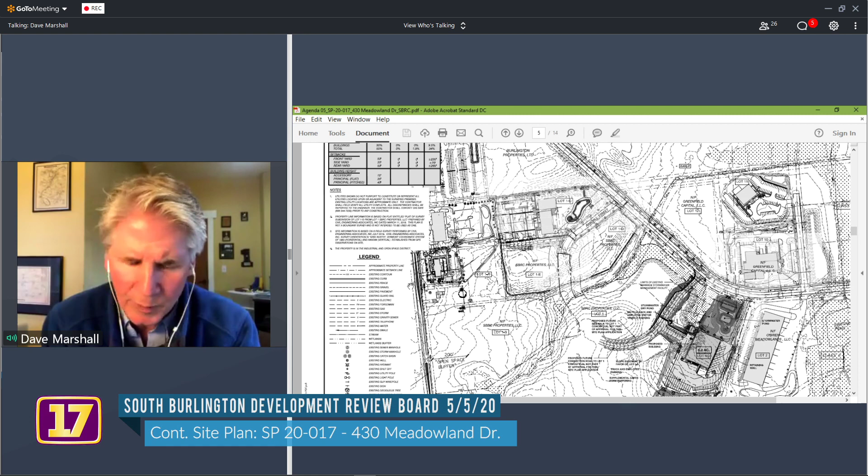And we submitted that for staff review. We do have four comments with regard to the site plan component, and then we also have additional comments concerning the proposed roadway. So to keep things simple, we can start on site and then move out to the roadway. Do you want me to read the comments?

Matt, you may have been muted there.

Okay, why don't we start out with staff comment number one. Staff recommends the board review the revised plans, including the truck turning movement plan, discuss with the applicant the proposed circulation patterns, and determine if they consider these criteria met. So maybe we can look at one of these images of the truck turning movements.

So Marla, there's sheet C2.5, which provides the truck turning overlays on top of the proposed conditions.

Dave, you greatly overestimate my ability to multitask. Dalila runs the presenter and I take the notes. Yes, Dalila, show us the truck turning movements. Oh, that's the one. That's the one I was looking at.

So what has changed since we last saw this? In this particular case, what has changed is that the access coming off of Meadowland Drive, that's the existing roadway in the top right-hand side of this particular drawing, and the curb cut — thank you, Dalila, or was that Marla? There we go. That represents the proposed curb cut. The previous discussions we had were that the state asked us to cross the wetland at the narrowest point.

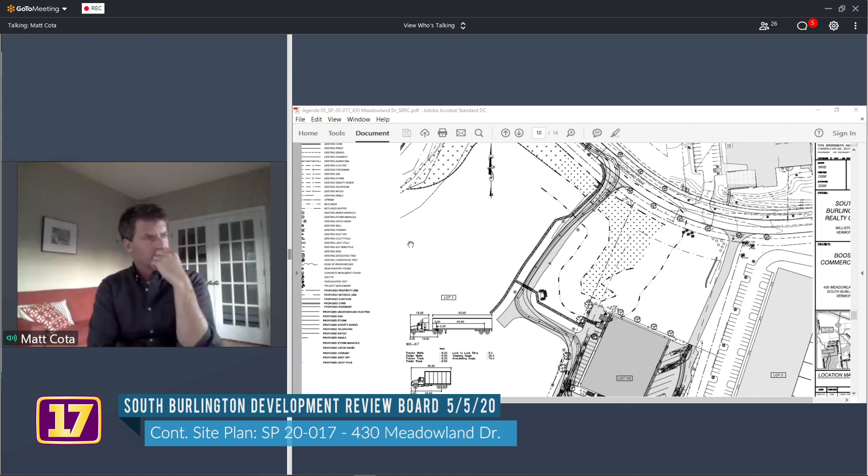Dalila, if you can just move the drawing up a little bit on the screen so everybody can see at least the bottom half of the site. You can see how the truck movements basically come into the site, either back into loading areas or into parking spaces, or continue back out from those particular spots onto the east side or right side of the site, and then continue on out into Meadowland Drive.

The truck movements aren't shown on that last new section of roadway, but ultimately being straight, it comes out. There will be a discussion regarding the radii used at the intersection with Meadowland Drive, as you go off this particular sheet for those who can see the plan.

Going back to the stormwater stuff, but skipping ahead to staff comment number 3, which talks about truck movement should only be to the left and recommends the board require the applicant to minimize turn radius on both sides to no more than 20 feet maximum, as indicated in figure 15.1D for streets. Can you identify, Dalila, maybe with a pointer, where we're talking about truck movements being only to the left?

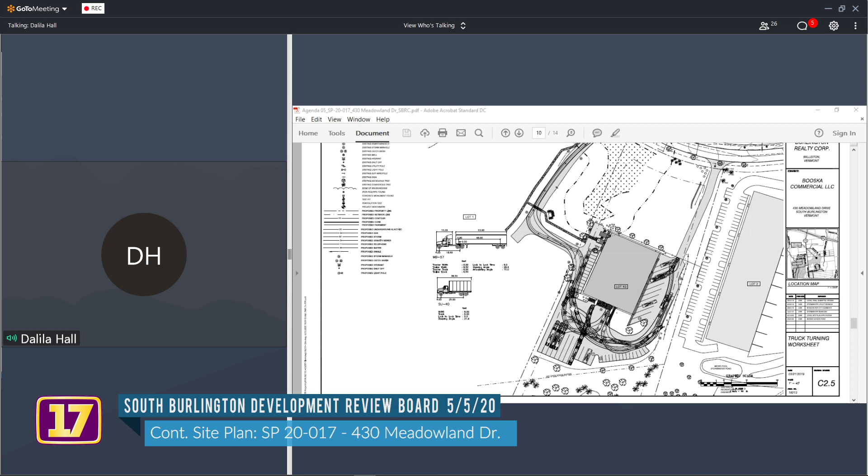There you go. All attendees can draw, so if you want to grab it, Marla. Sure. So if the circulation is sort of this direction, and Meadowland Drive is a dead end, trucks only leave this way.

We have no problem accepting condition number 3 as a condition of approval. So what it does is narrow up the throat of that proposed curb cut out of Meadowland Drive, and the radii becomes shorter. In this case, Marla's point is well taken that 99.9% of the truck movement will be to the left. There may be some client in the future on the right-hand side of this driveway, but most will be going to the left.

So we have no issue with tightening up that driveway to facilitate left turn only. Number 4, as long as we're still talking about the driveway, staff recommends the board require the applicant to place stop signs on both sides of the driveway and extend the painted stop bar across the entire width. David, does the applicant have an issue with this? That's acceptable as a condition of approval. Okay, that's good to hear.

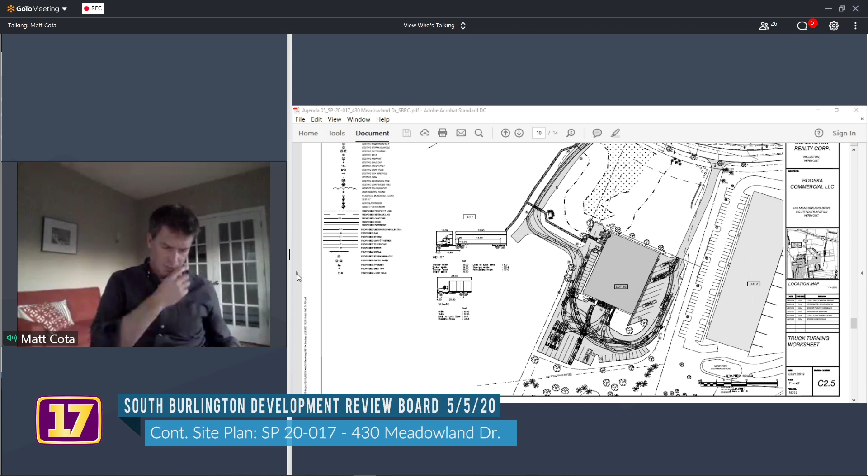Let's go back to stormwater. I'll just go over them briefly for those that don't have the documents in front of them or that are listening. The stormwater section has reviewed Booska Commercial at 430 Meadowland Drive, and the plan prepared by civil engineering offered the following 4 comments. First, that the proposed project is located in the Potash Brook watershed.

Second, that 12-inch type 2 stone should only be shown around the risers on the inlet side of each gravel wetland cell. Providing this around the outlet risers of the cells potentially allows for short circuiting through the system.

Item number 3, sheet C30C should be updated to include a silt fence and demarcation fencing to protect the wetland bounded by the stormwater features and access driveway. And number 4, the DRB should include a condition requiring the applicant to regularly maintain all stormwater treatment and conveyance infrastructure.

Staff recommends that we include these comments from the city stormwater section as conditions of approval. Is the applicant find that acceptable? That is acceptable. Okay, good. Is there anything else that Dave, Tim, or David would like to add before I ask the board if they have any other comments?

No? Anyone on the DRB have comments about the circulation or the left turn or anything else before we go on to item 6, which is related to this?

Okay, so while we've got you all here, we already opened it, SP 20-016, 362 Meadowland Drive, and we'll talk more in depth about the roadway, public and private. But first, the comment from staff: at the previous hearing, the board briefly discussed with the applicant the potential for a condition to prohibit additional curb cuts off Meadowland Drive accessing Lot 1. Staff recommends the board conclude this discussion.

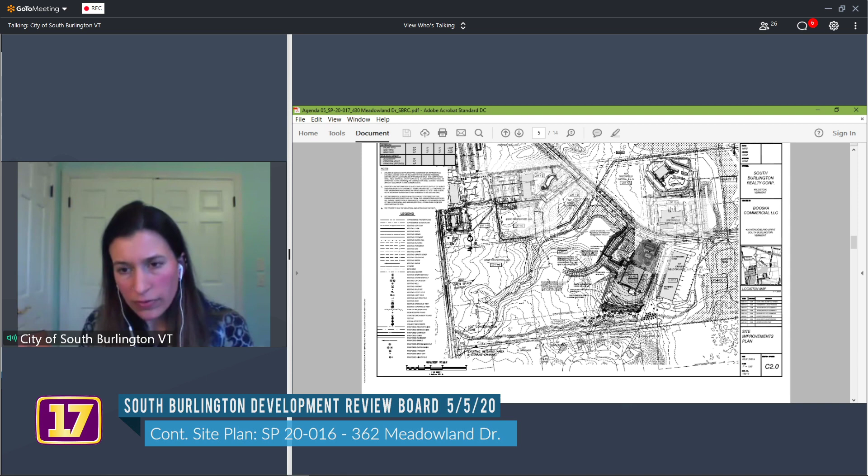Obviously, the wetlands program has said this is the only place you're going to be allowed to put in a curb cut. I just want to make sure the board didn't have any further questions for the applicant before making their determination on whether there should be a condition prohibiting additional curb cuts off of Meadowland Drive.

So Marla, if I understand how this works, if there's a condition that says no more curb cuts on Meadowland Drive, the only access to Lot 1 is through that new road, which may be public or may be private, depending on what happens.

Dalila, can you pan so you can see both Randall Street and the new one? Same sheet, just pan over a little bit. Even more. There you go. So, that is it. Go ahead, Marla.

Dave, do you know off the top of your head how far those two are apart? I'm going to say that's probably 600 feet. Okay, yeah, good. Probably closer to 800 feet.

So anyways, cutting to the chase here, the applicant is willing to accept a condition of approval that there would be no more curb cuts servicing Lot 1 other than what is shown on this plan. So we all see the writing on the wall with regard to both the city's desires as well as the state's desires with regard to this area of Meadowland Business Park.

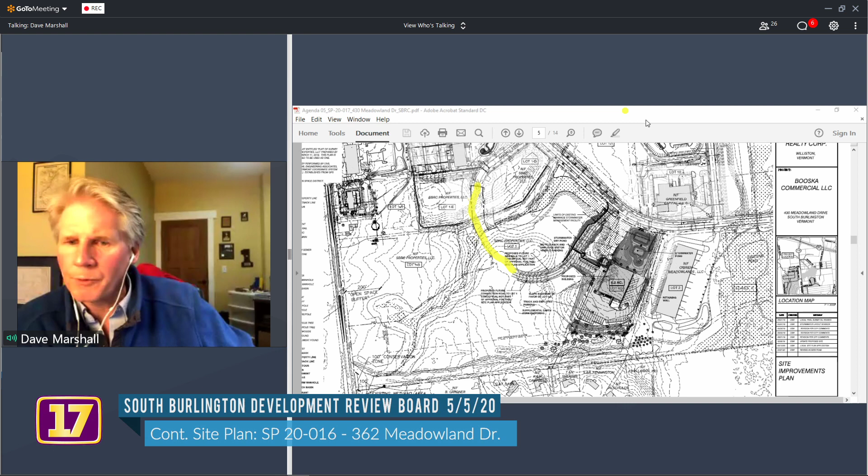Thank you, David. Anyone on the board, do you have any issues with limiting the curb cuts to this property? No, I don't, Matt. Mark here. Okay, thank you, Mark. No issue. It's John, I'm fine. This is Dawn. Thanks, Don. Okay, I think we're good there.

Moving on to item 2, the same comments from the stormwater section chief apply to this application. And I would assume, Dave, that you're fine with those comments as conditions of approval in this application. That is correct. This is acceptable as a condition of approval.

Okay, thank you. Moving on to page 3 of SP 20-016, item number 3. This is private versus public, which is pretty much the rest of this question, and how we're going to get to a decision on this new road and whether it's a private road or a public road or a private road to become a public road.

If I can paraphrase what is two healthy pages of questions, so I understand it, please Marla or Dave correct me where I'm wrong: if we are to say that this is a private road now, but could be made public should Lot 1 be developed, it's got to be engineered to the standards of a public road. That's correct. So is it right now to the standards of a public road? Or does something have to change in order to meet those standards?

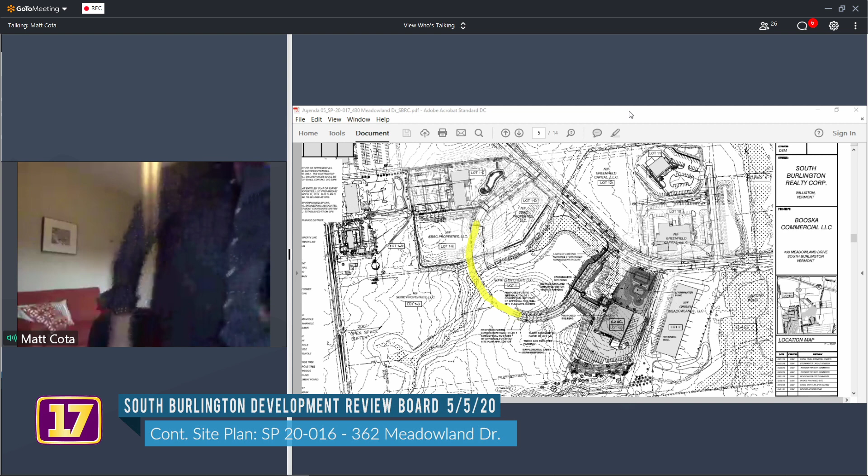Okay, so I think we have an agreement on what we want to happen. We just have a discrepancy on what the actual width is, whether we're measuring pavement or not. I'm not sure how to sort through that right now.

I'm not a street engineer, I have nothing to do with paving. This is John—I don't think it really matters. I think the point is we're accepting 26 feet of asphalt. We did before, and we would be doing so again. Matt, I agree with John. Thank you, John. Thank you, Mark. This is Jim, I do too. And Brian, I concur. Thank you, Brian. I'm good with that. Thank you, Dawn.

Okay. So what else do we have to summarize, Marla? Go ahead, Marla. The board is going to say it needs to be built to public roadway standards—it needs to be built to the cross section that is provided in the plan set, but it will be private.

Are we putting a specific thing or just until such time as the director of public works makes the recommendation? Well, we could either say that, or we could be specific and say until the road is connected to Randall Street, or lot 1 is developed and that road becomes a shared road.

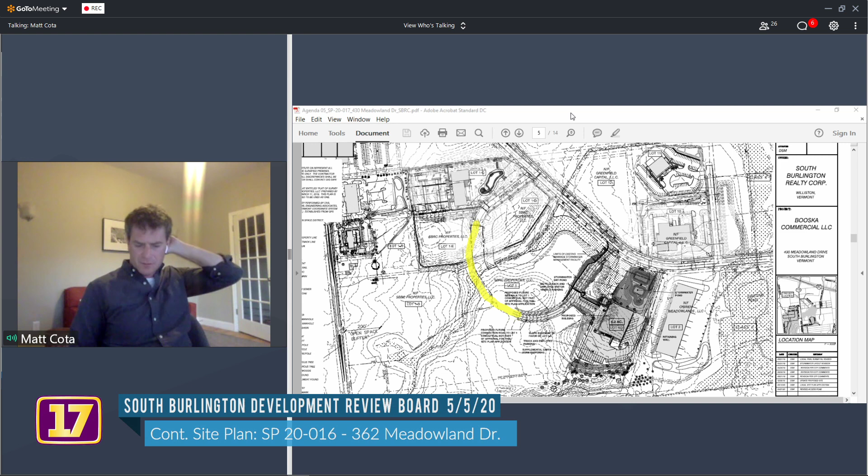Right, okay, I think we've got it then. Anything else, Marla? Nope, thank you. Okay, are there any other questions from the board or any other comments from the applicant before I turn it over to public comment for either application, either site plan application, SP 20-017 or SP 20-016?

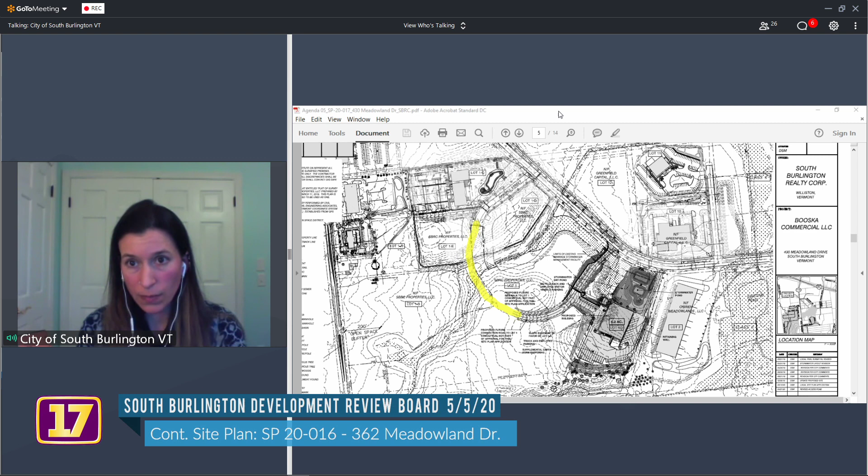So Matt, I need to be a little technical here, unless you want to lead it. Because of the meeting login snafu and the board's expressed desire to be as transparent as possible, I would recommend the board keep this item open to the next meeting. In consideration for the applicant, though, I would proceed with preparing a draft decision. And if there's no additional public comment at the next meeting, the board can go ahead and issue that decision, as though it wouldn't change the schedule unless there is additional public comment received between now and May 19th.

Right, and this is consistent with what we've done earlier, I think it was the second or third time we did the GoToMeeting app. And I will admit, this may be disappointing to the applicant, who wished that we could close tonight and not continue.

This is expressly for the purpose of allowing those that were not able to log in tonight, or had a technical challenge, an extra week or two to submit a comment. A draft decision will be done, and we'll continue it. The next meeting will be purely for the purposes of closing it, unless we hear comments or other information that allows us not to.

But that's how it is in this new world we're living in. So what is the date of the next meeting, Marla? May 19th.

I would move that we continue site plan application SP 20-017 and continued site plan application SP 20-016 both to May 19th. Do I have a second?

I'll second, this is Dawn. Seconded by Dawn, and we'll call the roll so this is clear.

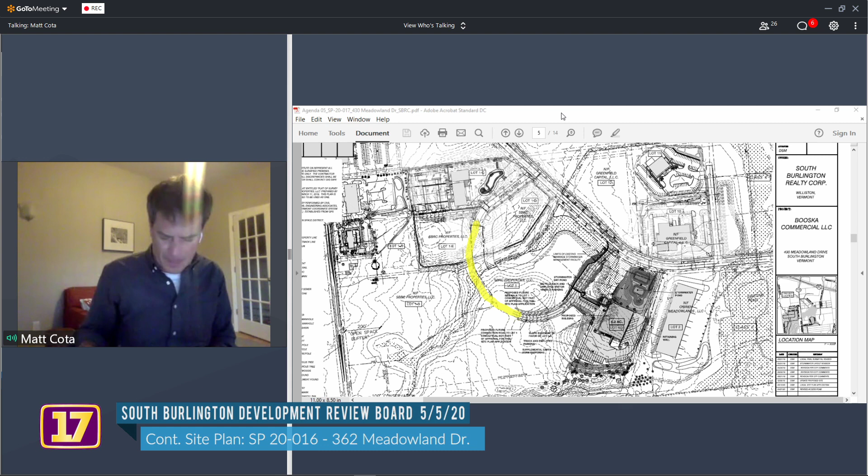This is miscellaneous application MS 20-01 of Burlington International Airport to establish an overall landscaping plan for an approved airport complex at 1200 Airport Drive. Who is here for the applicant?

Larry Lackey, Director of Engineering and Environmental Compliance. Carolyn Orban, Wagner Hodgson Landscape Architecture. Keith Wagner, Wagner Hodgson Landscape Architecture.

Anyone else out there? This is Dawn. Before we have the applicant present, I have a question for probably Marla. Okay, sure, I just have one quick thing to say first.

Keith, I think we're getting some feedback from you, so if you could be proactive about muting when you're not actively talking, that'd be really helpful. Thank you, sorry. That's good advice for everyone, including me.

Okay, Dawn, with your question, go ahead. In the past several months we've had a number of applications related to the airport, and I admit I don't know a lot about the organizational or ownership structure, but it seems like we've had a lot of different applications. Could you explain, are these unified under some previous master plan? Is there a way to tie these together, and why are there all these different applications? I understand the hotel is probably owned by someone else, but...

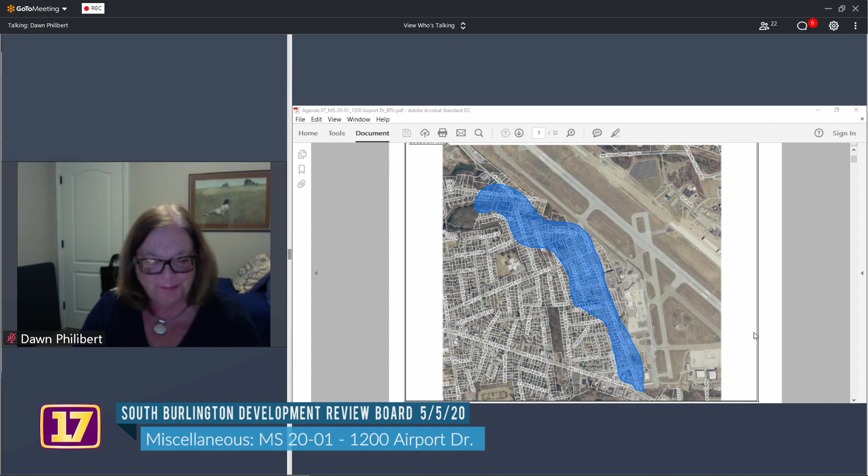Larry knows this better than I do, but there are much grander plans than what we're seeing here in the master plan for the airport, and it's simply too complex to step into in one meeting like this. But it might be worthwhile, even though it's probably better for planning commission, it might be worthwhile at some point for the airport to sit down with planning commission or DRB to walk through what's coming over the next 10 to 15 years. There's a lot there. I've been to meetings on it, and this is just one step.

Okay, so thanks, John, we'll see a lot more. From the airport's perspective, every 5 or 10 years we go through a new master plan process where we're required to by the FAA. We're currently in that process, and we're going through multiple public meetings, which we've had, which Paul Conner typically from the Planning and Zoning Department takes part in.

But we would gladly come in and talk about where we're at from the old master plan and what we're looking forward to for the next 10 or so years in the new master plan. There's been multiple public meetings, and there's going to be still multiple more on our overall master plan. And we did tie this landscaping master plan into our overall FAA master plan to pull them together.

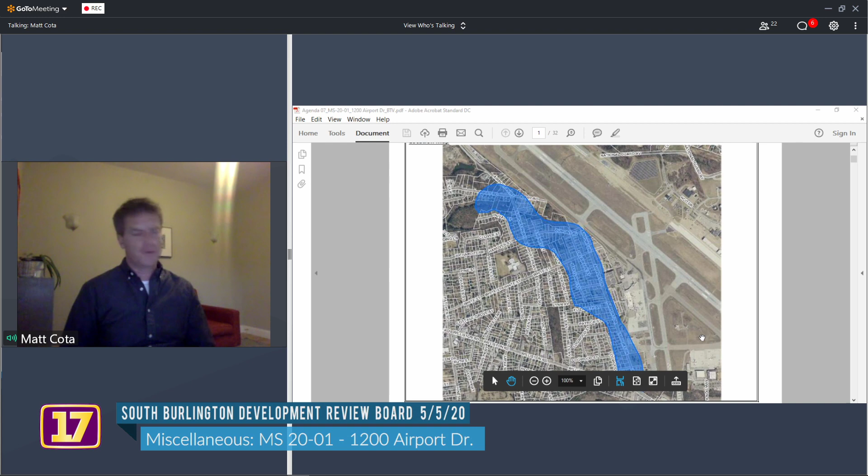Okay, so Larry or anyone on your team, maybe we best proceed with this. If you just give us a brief summary overview, and then we'll go through some of the staff comments more in depth. But if you could do a 30,000 foot overview, no pun intended, of what you're trying to do here. All right, well, I'll do a little introduction, and then I'll turn it over to Carolyn, who's done most of the work with Keith.

Basically, we come before you for multiple applications, as we just spoke about. Landscaping is a challenge due to safety issues with respect to the airport, both from trees at the end of a runway or attracting wildlife within the airfield fencing.

So we have to be very careful, and we have requirements we have to live by, including full-time USDA coverage for wildlife. When we came before you for our maintenance garage addition, which we have not moved forward with because we're looking at a bigger project down the road, we were asked or provided a condition that required us to submit a master plan for landscaping. Just that the condition was to submit it.

Please understand that the plan that we've developed, we worked with your staff, and it is a concept. It's a live document, and will be continually changing as time goes on, as the city progresses and the airport does. But this is our starting point. And with that said, I'll turn it over to Carolyn and Keith to do a 30,000 foot overview.

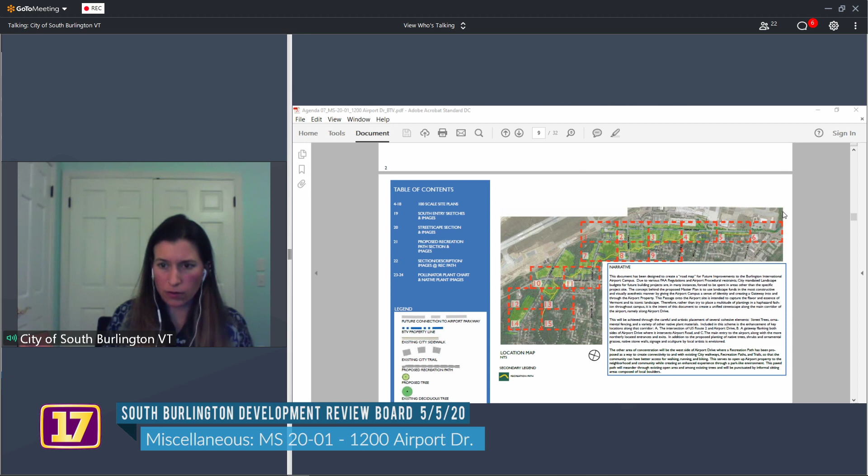You can draw on it if you go to the top and click drawing tools, if you need to point to something. I'm going to have a hard time with this because I can barely see it, the green is so small, but basically this is it. We did have, from the entrance over to White Street, it goes kind of like that. Did my line draw? Let's try that again. Doesn't seem to be working. There you go. Oops, that wasn't very good.

Sorry, but what I'd like to say is that we planned all the paths so that they would be on the west side of that line. So to cut to the chase, Carolyn, the answer to the staff question is we're not creating plantings that might be disturbed should that alignment of the road happen. Well, that's to the best of our knowledge, unless that alignment itself is conceptual. But to the best of our ability, yes, we have kept the planting we want out of the way.

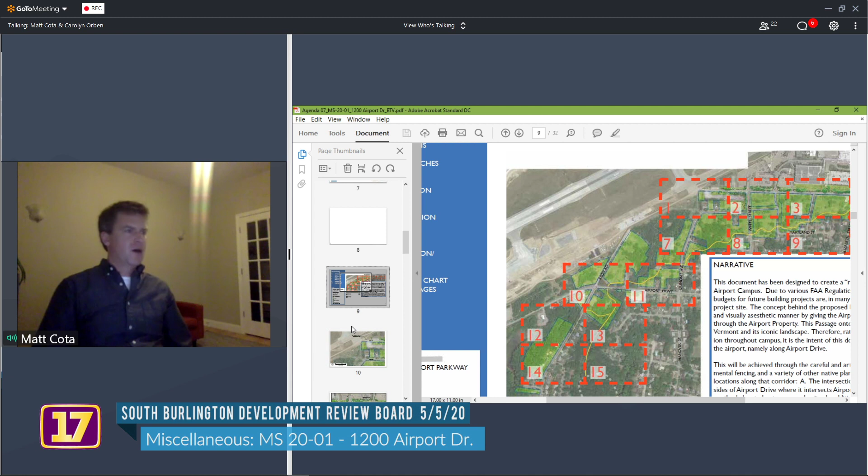Number two: the applicant is proposing a recreation path along the west side of the airport-owned land. Staff recommends the board ask the applicant to describe the proposed recreation path features. This will go on the west side over here. If you want to go to page 21, Dalila... keep going... the second one down... 27 here, there we go.

So we're envisioning a paved path, bituminous concrete, with boulders interspersed along it, and it would meander through the existing trees on site, and look similar to these sketches and these images.

Nice. Any questions from the board regarding the recreation path? Is this bikes or just walking? Both. Yeah, both.

I like it. I like the shade trees, if that's what we're gonna have. You know, this is just a conceptual drawing, but...

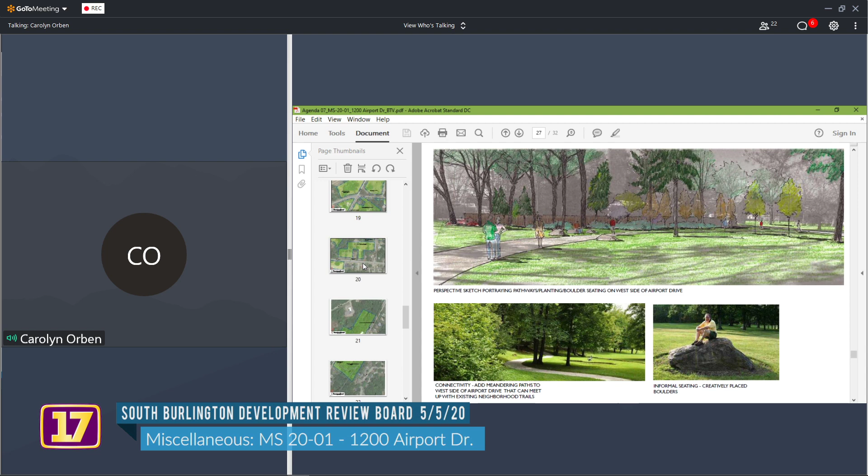Carolyn, does it loop around, or does it empty out? How does it connect into the roadway? Is it a circle? It's quite lengthy, you have to look through all the pages. It goes all the way through the site. If you go to the page we were on when I was drawing that line, you can follow the path. It weaves all the way from Airport Drive, at the corner of Airport Drive and Airport Road, all the way north. It's a yellow line. Yeah, and you can see where it connects down at city property. And then does it terminate at number 15, with the circle there? Yes.

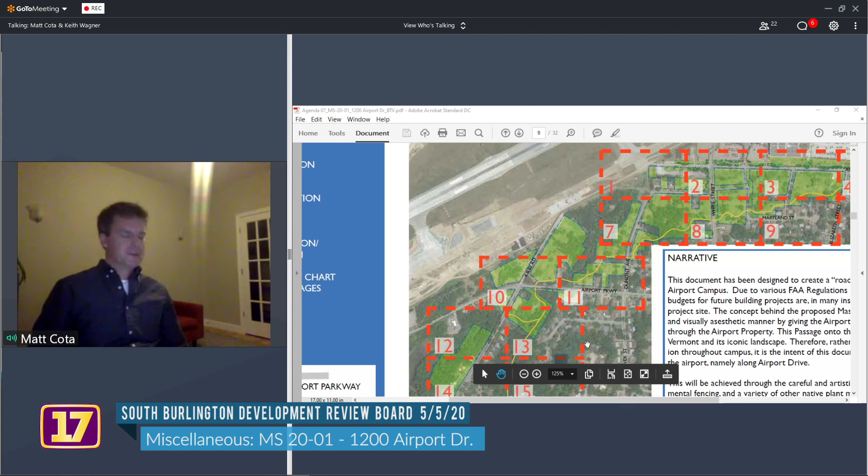Okay, if there's nothing else on the rec path, the staff and applicant may discuss whether—this is item number 3—it made sense to include a sidewalk on the west side of Airport Drive. The ultimate conclusion was that existing sidewalks provided adequate access to buildings, and an off-road recreation path better addressed the recommendations of the Chamberlain neighborhood study. Staff recommends the board review the existing sidewalks to determine whether they agree with that conclusion.

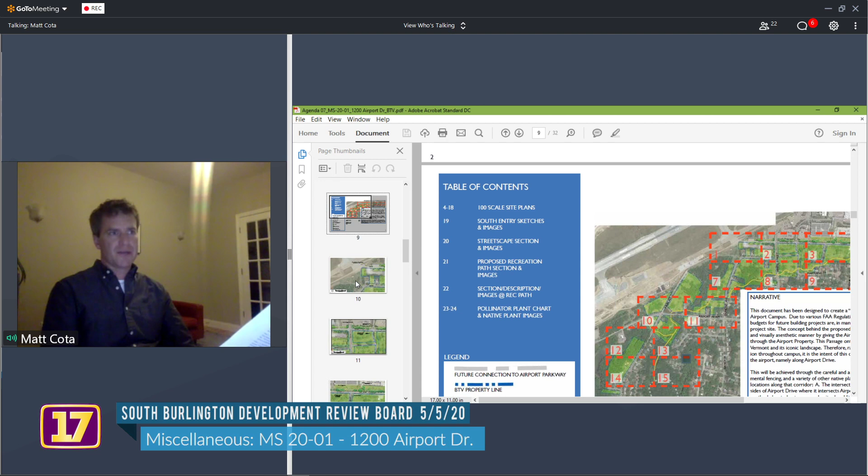I haven't been out there recently to check out the sidewalks, but if anyone else has—I certainly would concur that a recreation path is desirable per the Chamberlain neighborhood study. So, but Elissa or Jim or Brian, any other thoughts about that?

Hey Dalila, could you go a little bit farther, a couple more sheets? So you can see here, perfect, that there's only a sidewalk on the east side of Airport Drive, there's no sidewalk on the west side. This is where staff met with Wagner Hodgson, and we talked about it a lot, and concluded there was no destination on the west side, so it didn't make sense to add a sidewalk there. So the sidewalk you're seeing on this sheet is existing.

Dalila, can you go up one sheet, just one more? So now we're on page right, connecting to page left of the previous page. There's still no sidewalk on the other side, but there's also still no destination. One more sheet up. And then there's the crosswalk right under the word 'continuation of.'

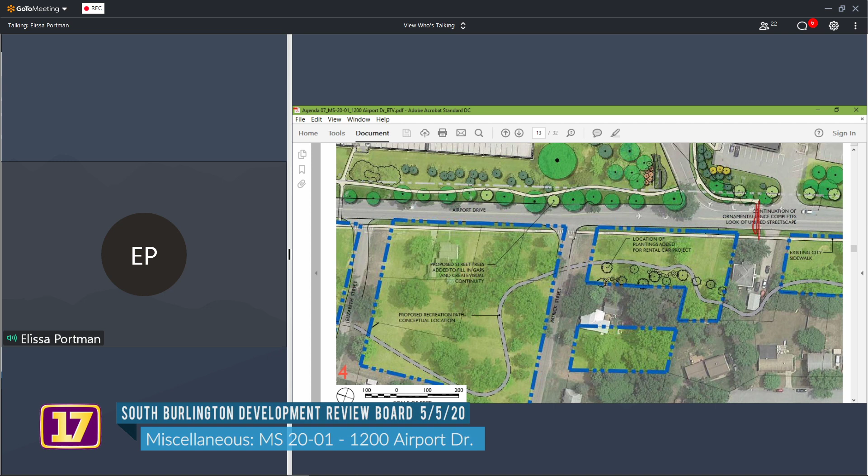Okay, item number 4, review the plans on a sheet-by-sheet basis. Sheet 1: the city has identified the bend in Dumont Avenue as a potential location for a stormwater BMP associated with the Centennial Brook Flow Restoration Plan. The city works with landowners to establish agreements allowing the BMP to be located on the property. The city would be responsible for construction and maintenance of the BMP, but would not install any landscaping beyond the minimum necessary for BMP success. Staff recommends the board ask the airport to include in their plan a general concept of landscaping they may wish to include around the BMP, and support the board's inclusion of this landscaping in the overall landscaping plan.

So this doesn't exist yet, correct, Marla? This is a potential stormwater mitigation measure at a couple spots on Dumont Avenue.

Right, so just going through on a sheet-by-sheet basis, I guess we could pull up the other plan, or just draw on this one since it's not that complicated. If you wanted to just leave it up, I think it's fine. Yeah, just leave it up and draw on it. You can.

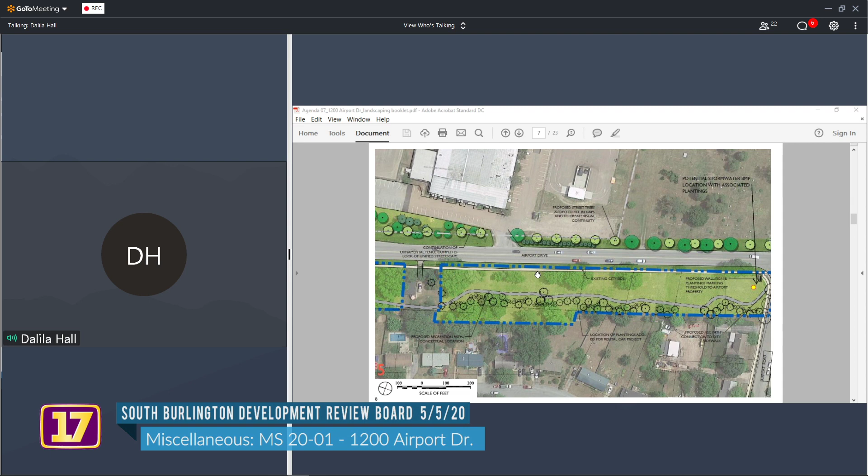You got it, just flip back to the PDF, should be fine. Sorry, it's giving me issues. There we go. That better? I think it's sheet 4. Yep, you just passed it. One too many, I guess it was 3. Is that the sheet? No, 4, sorry. So if you go to sheet 3, please. PDF page 3. There we go.

So this is where the little yellow dot is what we just waited for. I'm really sorry, I should have just gone to the little yellow dot. This is where the city has identified a potential location for a flow restoration plan stormwater practice. The city would be installing this practice with agreement with the landowner, being the airport. There's an opportunity here for the airport to beautify this feature. Not sure this one makes a lot of sense, but there's another one farther down. I don't know if Carolyn, you guys have given any thought on your interest in beautifying this one, and then we can talk about the other one when we get to it.

All I was going to say is that we're happy to include a concept for additional plantings on both of those BMPs, and we've noted it on the updated plans.

Larry, did you want to say anything about it? Right now we believe they're going to be underground chambers, so it's not going to look much different when they're finished, just the grass lawn, but we don't know that yet until we work it out with the city.

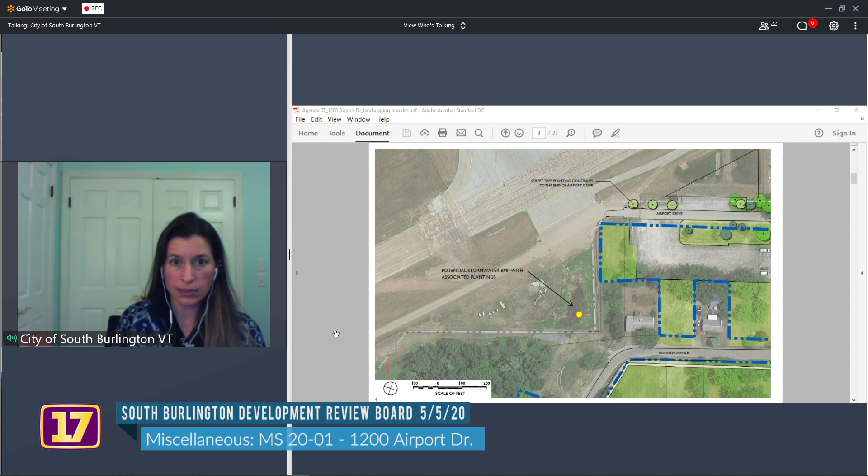Marla, does the city come to you for permits for those? I'm sorry? Does the city come to you for approval of those BMPs? It depends on the type. If it requires movement of more than 20 cubic yards, either net gain or net loss, they'll get a DRB permit, but if it's less than that, they will not.

Right, okay, well these are rather small ones, and again I think they're going to be looking towards underground chambers. So it sounds like this one's not a good candidate, which is fine. We can just move on.

Okay, just going in order, item number C, sheet 5, similar to sheet 1, city has identified the northwest corner of Airport Drive and Airport Road as a location for a stormwater BMP in support of the Potash Brook Flow Restoration Plan. Staff recommends the board allow landscaping around the BMP as credit towards the minimum required landscaping budget and overall landscaping plan. So let's look, is this a different location you're going to show us, Dalila and Marla?

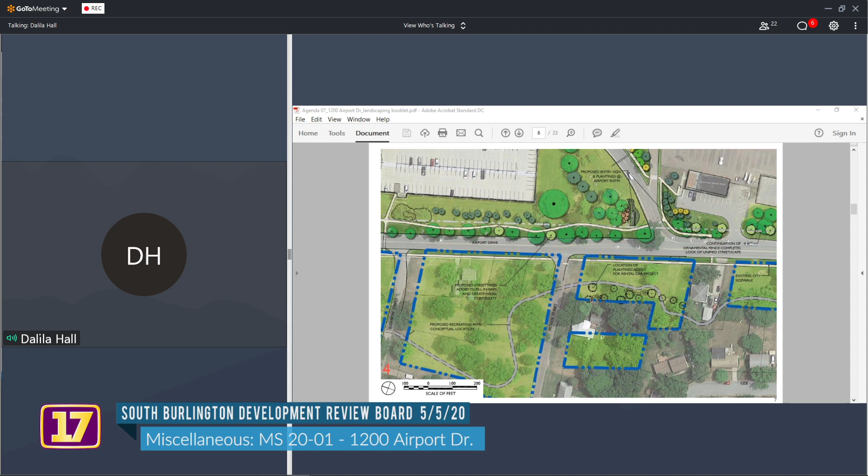Is it sheet 5, PDF page sheet 5, or this page marked 5? The page with the 5 in the corner. Yeah, that one. Okay.

So again, the yellow dot, this one is obviously more on the rec path. Yeah. You could see why you'd want something there. I'm not sure why. We also have a gateway component in that area, so it might all tie together. Yeah, that would make sense, Carolyn. Okay, well, I think that's important to tie it all together.

Item number D, sheet 7 and 9. Do you want to go back? I think we skipped B. Oh, item B, sheets 2, 4, and 6. Yeah, sorry about that. I was just getting the B piece.

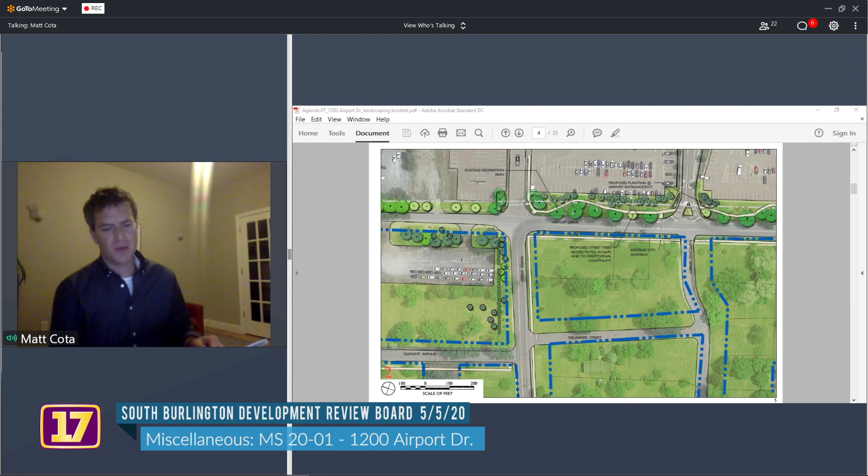These sheets generally show infill landscaping, the recreation path, and some features around the entrances to the airport driveway. Staff recommends the board review the type of entrance features proposed and make a determination on what elements they would allow as credit towards the required landscaping budgets. So maybe we want to pull up sheet or page 19, which shows those features.

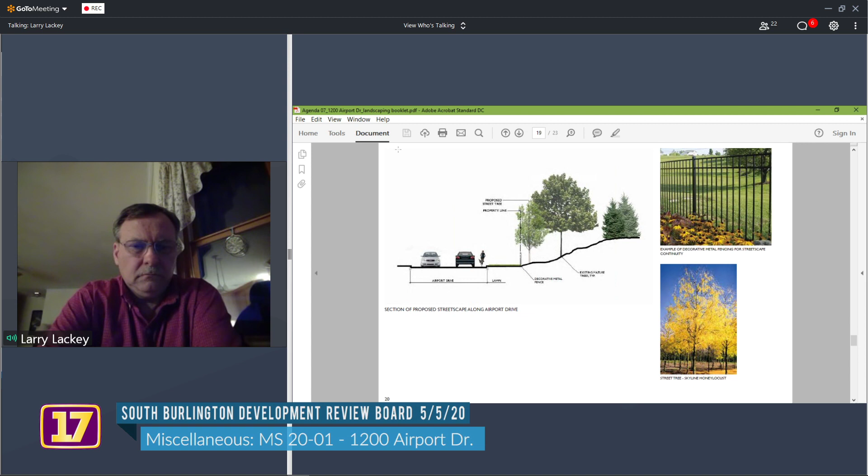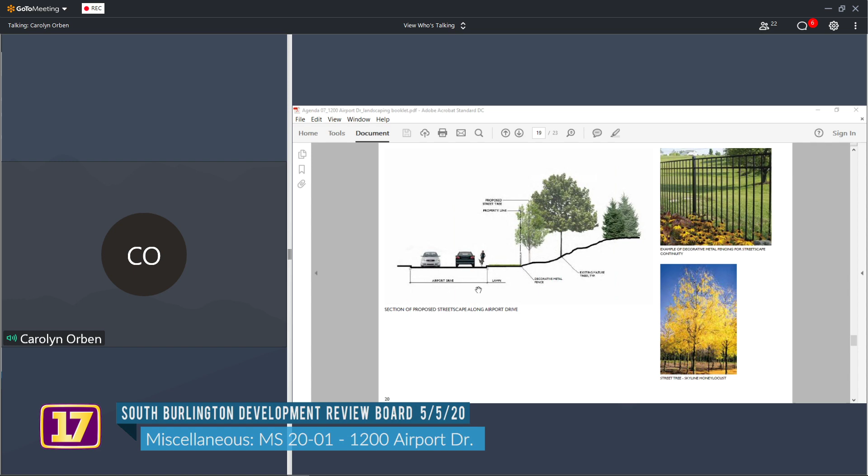Keith, did you want to add anything to that? Yeah, this is Keith Wagner. This was an important intersection for the identity of the campus, with traffic coming east-west on Williston Road, and what's the other road coming right at it? Kennedy Drive. So we thought it'd be interesting to pull the identity of the airport down to this intersection, using similar materials we're using in other locations, just creating a welcoming point where people know they're now arriving at the airport, sort of main intersection, if you will.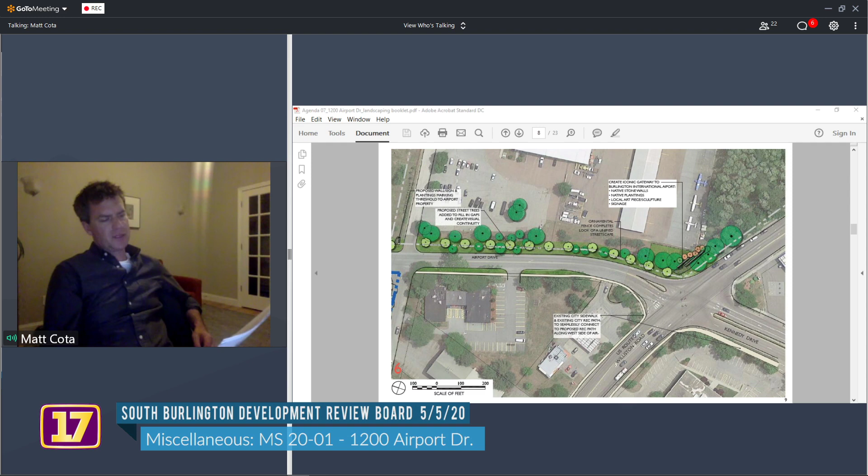Okay, if there's nothing else, item number D, sheet 7 and 9. These sheets show the proposed recreation path. There are no crosswalks at the proposed roadway crossings. Staff recommends the board ask the applicant to include information on the concept of how roadway crossings will be achieved on local residential streets in this overall landscaping plan package.

One thing I wanted to say is the crosswalks themselves would be maintained by the city. I think that's somewhere else in the staff comments, but it didn't make it into this paragraph. So the crosswalks, once installed, if on public streets, we would be maintaining them, which is fine. Do the plans show that? Yes, they do, right there. Yeah, there's one. Is there more than one?

So we don't have the crosswalks identified at this stage, but we're anticipating painted lines, and that could be part of the budget if you think that's appropriate.

This is Keith. I also think this master plan is a concept, and where we've drawn this rec path, it may move. It's important that the airport and ourselves and the city work together to fine tune where these are crossing and how that's going to be done. I think what we're asking is, do you agree with this concept? Moving forward, as it crosses the road or city property, there's got to be some coordination. To date it's been a really nice dialogue back and forth about our concepts and Marla's and Delilah's concerns. So more of that is going to happen, probably with the street department, on exact locations.

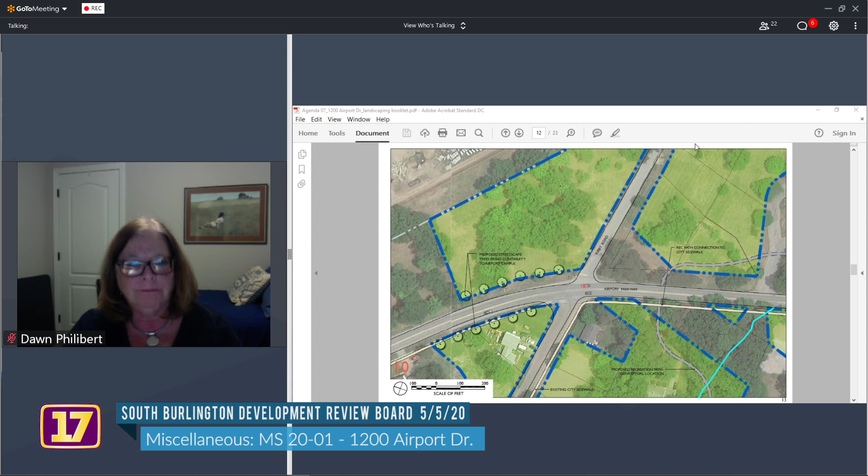I don't know about under, but maybe over. Well, listen, folks, I don't think anybody but me has brought this up from the applicant standpoint. So maybe we should just let them propose something if they want to do it. That's good, good conversation though.

I have a scenario to run by. This is Larry again. So why couldn't it be, and I'd only be thinking of this in simple terms - say we had an area and the budget, we wanted 4 trees, but the budget would only allow for 3. But as long as it was left aesthetically pleasing, presentable and nice, that 4th tree gets planted under the next project. Why wouldn't it be as easy as that? Or say something gets left out and then gets put in the next project in the step of projects.

Larry, I don't have a problem with that as long as there is a next project in the pipeline. And I know what my friend John is saying about things that are going to be in the pipeline, but it would seem to have to be a nexus of where this is going to go, not just the player to be named later, but an actual location based on plans that are in the works.

This is Marla. I think I'm hearing 2 questions. One is, if the budget is $30,000 and in order to complete a segment it's going to cost $40,000, can that extra $10,000 be banked? The other question is, if it can't be banked, does 25% of that section just kind of hang out there until the next project happens, and then that section only gets 75% built? So would the board be okay with allowing them to build the extra and bank it, or alternatively, would the board be okay with them only building 75% of that segment? Is that not kind of the two questions?

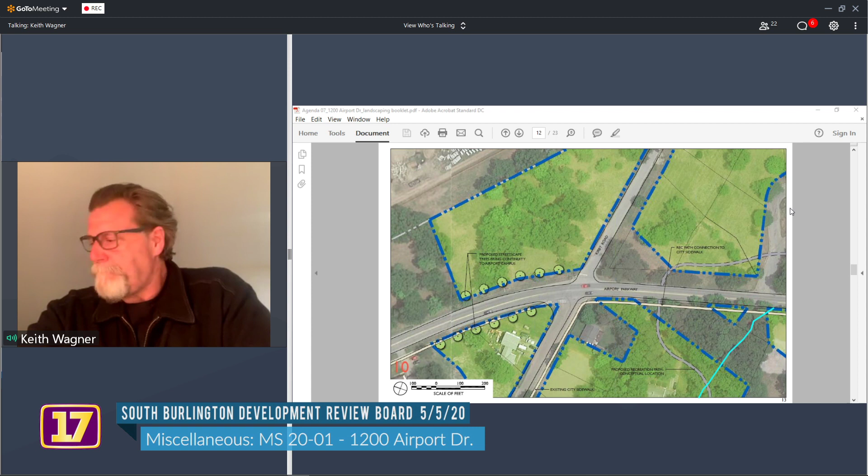Exactly. Okay, so I think we're coming to some sort of consensus here. Where do we move off before we get on that? So can you just summarize the consensus?

In my mind, the consensus is in areas, in projects in which, as we've seen in the past, I can't name them offhand, but where it's difficult to meet the landscaping budget, that wherever they fall short, that money can then be used for, or where they've banked. So for instance, if they go over the landscaping budget for one specific project because they have to, or they want to, or for whatever reason, in other projects that fall short of the landscaping requirement, that excess landscaping that went into the entrance can then be used to backfill any percentage or dollar amount that they could not meet. That doesn't eliminate them from us requiring landscaping for projects just because they've spent a gajillion dollars on the sign out front on Williston Road. But what it does is it allows them, where they can't meet that standard, to backfill that requirement.

Did I explain that right? Well, the purpose of the landscaping plan in general is to give them a pre-approved place to put landscaping that's not on a particular site.

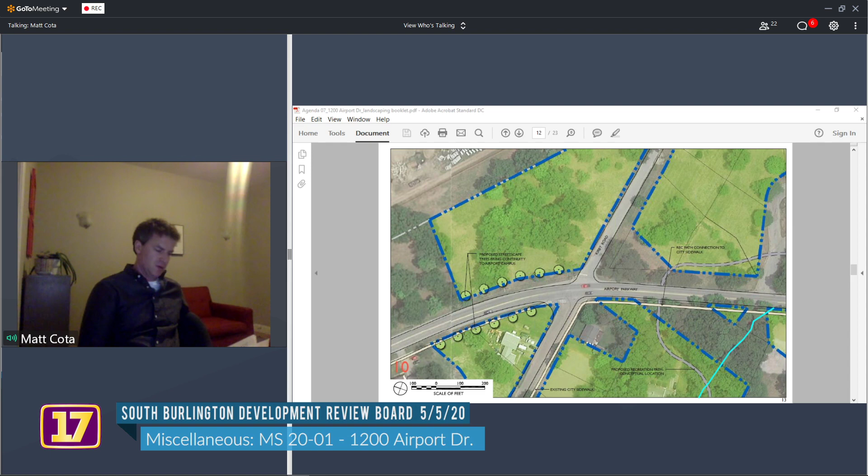Okay, so where we're at now is E. Sheets 10 and 11. These sheets show 3 or 4 locations where the proposed recreation path crosses city land, including the recently discontinued Picard Circle, which now contains subsurface stormwater infiltration chambers.

Staff recommends the board discuss with the applicant who they intend to be responsible for construction of segments on city land. Once constructed, staff considers that since these crossings are relatively short, the applicant should be responsible for maintenance of these sections of the recreation path and recommends the board include such condition in their approval. The city would be responsible for maintenance of the street crossings.

Larry, Carolyn, what's your response to that? Larry, do you want to respond to that? Yeah, I guess if it's on city property, and it's a city path, like snow removal and all that type of stuff, wouldn't they be responsible for keeping it clear for the public?

So this path is proposed to be on airport land. Are you proposing to deed it to the city, the portions on airport land? No, I'm asking about where the path crosses city property. Right, there's a couple places where it crosses just a tiny bit of city property, going from a big stretch of airport to a short stretch of city and back to airport. So if the airport is maintaining and plowing a big stretch and there's a 30 to 50-foot gap, our thought was it made sense for the airport to just continue that piece since it's short. That's fine, yes.

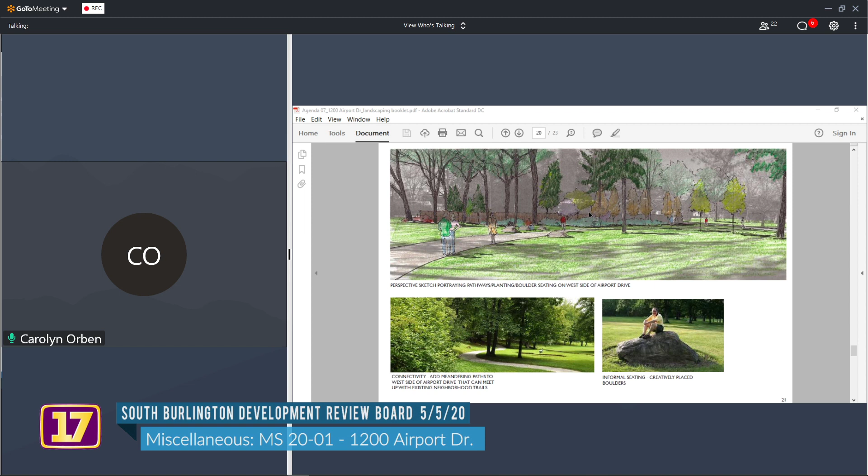Number 7: when a project is proposed that has space available for landscaping beyond what's required by the minimum screening and buffering standard, the board wishes to define at this time whether the required landscaping may be spent on site or whether the applicant must furnish this plan. Marla, does that comment provide more context for number 7?

I'd like to put a finer point on it. There are screening and buffering standards required to be met on site. Say in a magical world there's a property on the airport being redeveloped, and they find they can meet all the screening and buffering standards without using their whole landscape budget. There are two options: one is to put the additional landscaping budget on site, put in a nice planter area, maybe make employees go there for lunch. The other is to build 200 feet of rec path. Does the board want to predetermine which of those choices they have to make?

Is that clear? That is clear, Marla. My opinion is I don't think we can predetermine that at this stage because we don't know what each project's going to entail, since we always look at every project case-by-case. Well, I'd say that realistically the airport can't predetermine it either, so it seems premature. We're dealing with a master plan.

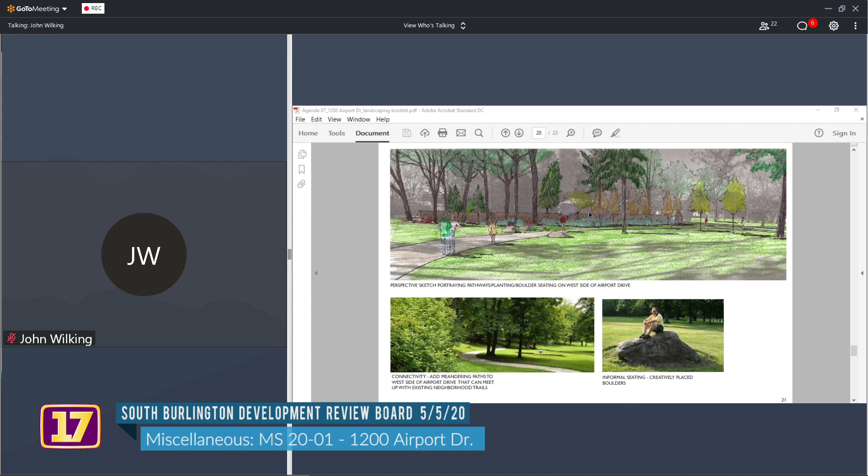This is John. Do they need to come back to us at a later point for approval of a less conceptual plan? What is the process, Marla? The way we're proposing it is that they would come back when they do a project they want to use this for, with a detailed site plan.

Going back to what Dawn is saying: if we were to approve this master plan, or miscellaneous plan, and they propose using their landscaping budget for a specific application not in conformance with the master plan, would they have to revise the master plan, or the miscellaneous landscaping plan, if the landscaping were not on the project site, in the vicinity of the project?

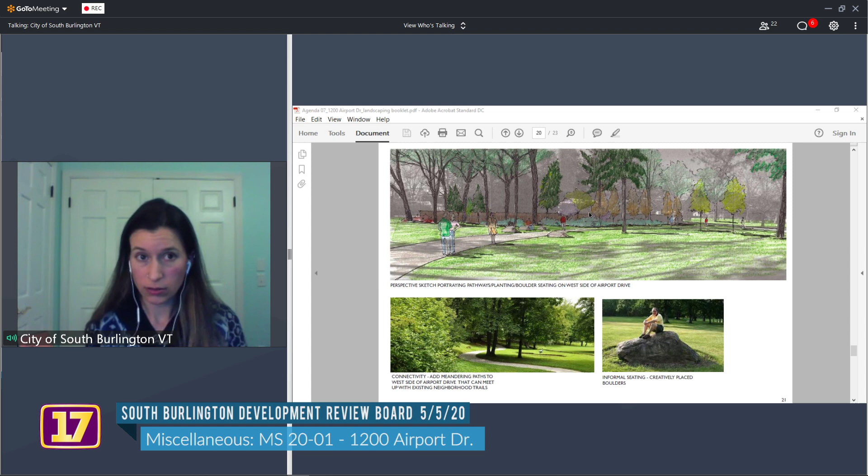Okay, so if they're landscaping a new building they're building and 100% of the money required for landscaping is spent on site, there's no change to this miscellaneous permit application. But if they were to spend it off-site and it wasn't spelled out here, they would in fact have to come back and change this in front of the DRB. Yeah, I think that's a good point that didn't get captured well. Does the applicant agree with that assessment or have a counter position? No, that sounds good.

That segues into item 8: to what degree is this plan proposed to be flexible? Staff recommends the board include a condition requiring a detailed landscaping plan to include a plant list, planting, and hardscape details be provided concurrently with the site plan for which the landscaping is proposed to be installed. That makes sense, right? Is there any disagreement with that? No disagreement.

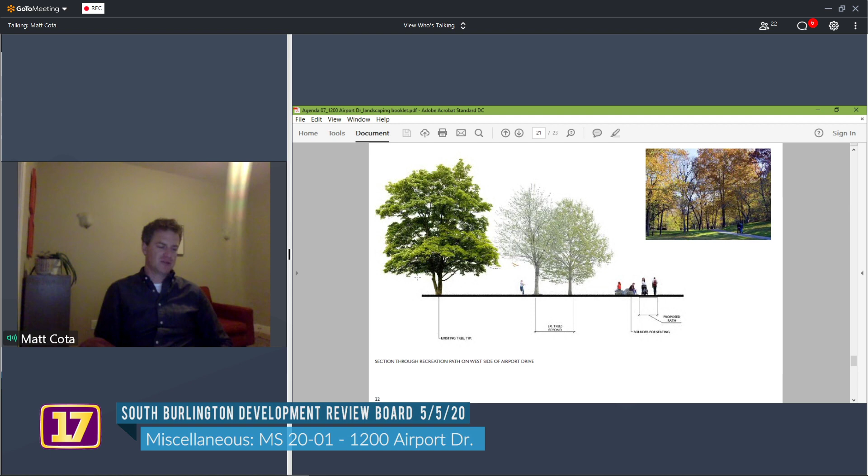Staff recommends the board require the applicant to update the plans to show the current property ownership, including shading for city-owned lands and all lands owned by the airport, as distinct from lands owned by private entities. Is that okay? Yeah, we're working on that. That's fine, fantastic.

This is something we've been asking for a long time, and I think this makes a lot of sense. I think this is a tremendous amount of good work being done here. I'm not sure process-wise where we go from here. I'm going to open it up for public comments, and then we can talk about that. But is there anything the applicant or board members would like to say before I offer it up for the public to speak?

This is Dawn. I just want to say I think it's a great plan, and I think it will really enhance that corner of the city. Great, thank you, Dawn. Yeah, I'd like to thank Larry for the work, and pass along to Gene that it's nice to see improvement in the city. Thank you. Gene was very happy when we reviewed this with him.

So if anyone in the public would like to make a comment about this miscellaneous permit application, landscaping plan for the airport, there are three options: one, when I ask you to say your name, I'll call on you individually; or enter something into the chat function; or write an email to mkeene, MKEENE at sburl dot com. Is there anyone that would like to speak? Please say your name.

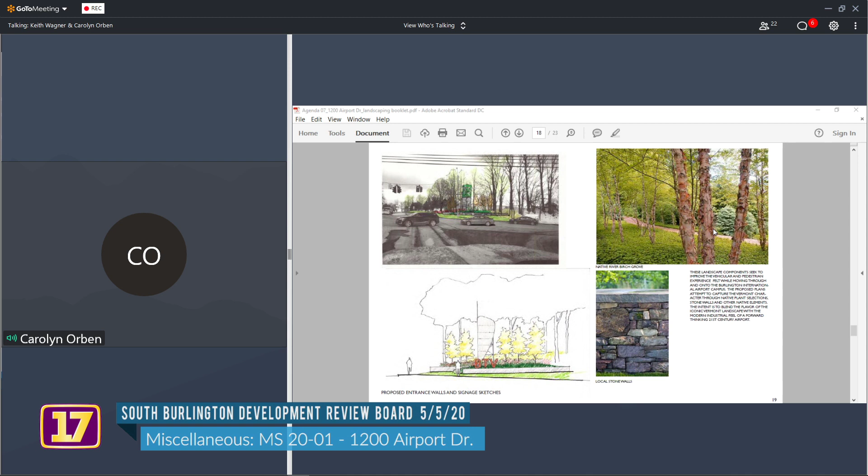Okay, then we can't put you on the next meeting. Oh no, but I think... no, probably not the next meeting. But I guess my hope is that you see, as a board, that we're putting together this master plan and we're working with you and trying to satisfy what you requested of the airport. So if it has to go out another meeting, not the next one but the following one, are you all right with that as a board?

Let me give a little context. The airport has several balls in the air right now which are relying on this because of that condition requiring it to be developed. So if the board says we're generally okay, we agree that you're progressing this, you've got a rescheduled hearing, we've seen it, those projects can move forward, and this doesn't necessarily have to be finalized before those projects can be heard for preliminary plat.

Right, so June 2nd would be the next day after the 19th. Yeah, so that one is real full. Marla, we're on June 2nd for the apron. Do we just want to do it then? June 2nd.

Yeah, I guess that's true since you're already there. As long as it doesn't impact the other projects, you know. But it is good to get the related projects together too.

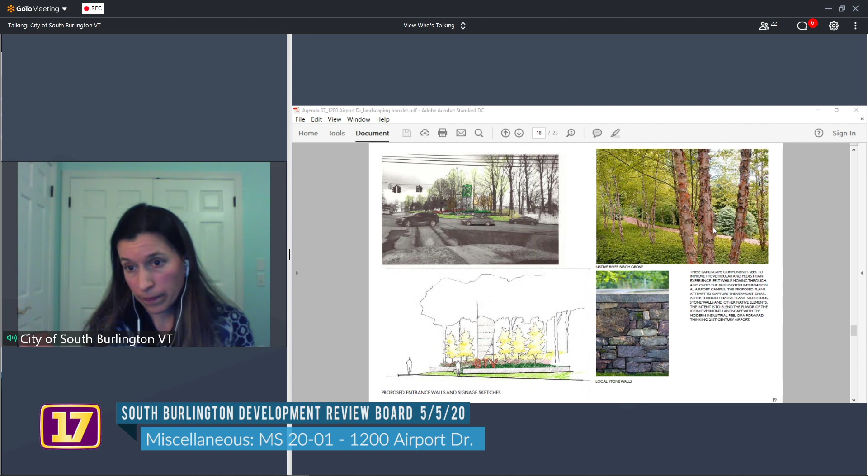Is that all right, Larry? Yeah, that's fine, I mean, yeah. Okay, I think the condition was just to get the plan submitted, and we put a lot of effort into this, and we're moving forward.

Thank you, Marla, for that brutal honesty, I appreciate it. I would move that we continue miscellaneous application MS 20-01 for Burlington International Airport till June 2nd. I would second that, this is Dawn. Seconded by Dawn.

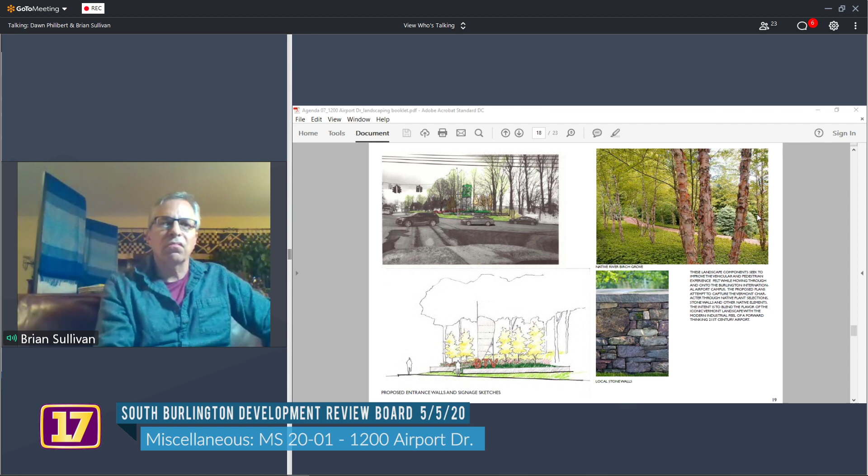Roll call: Brian Sullivan, aye. Dawn Philibert, aye. Mark Behr, aye. Melissa Portman, aye. Jim Langdon, aye. John Wilking, aye. And Matt Cota, aye. We'll see you on June 2nd.

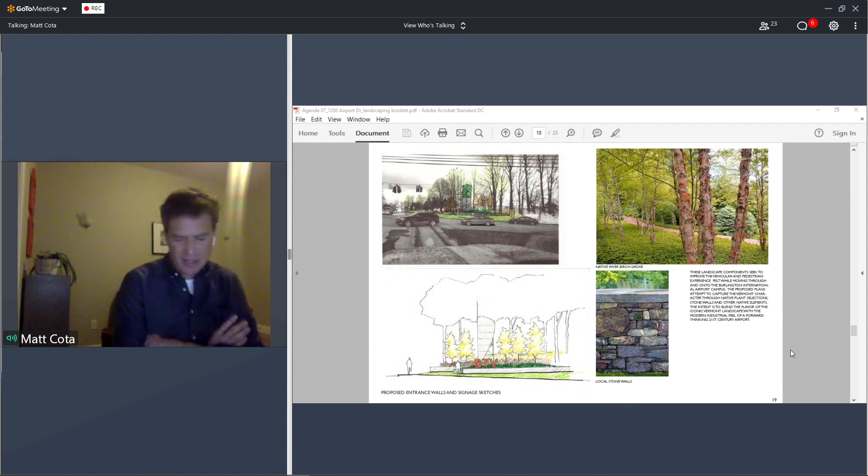Moving on to agenda item number 8, sketch plan application SD 20-15 of Don Stewart to amend a previously approved plan for an airport complex. The amendment consists of constructing a 17,200 square foot two-story addition to an existing 39,200 square foot one-story existing hangar office building, reconfiguring the adjacent parking area and related site plan improvements at 1150 Airport Drive.

Who is here for the applicant? I am Don Stewart, I'm here for the applicant. Also Chris Gendron from Stantec. I trust you can hear me okay? Yes. Hey Don, Don and Chris. Anyone else for your team? Larry Lackey's still here too.

Carolyn Orben will be speaking. We also have present Joel Page, who is our architect, and along with that we have both Billy Newton and Kyle Clark from Beta. Great, thank you very much.

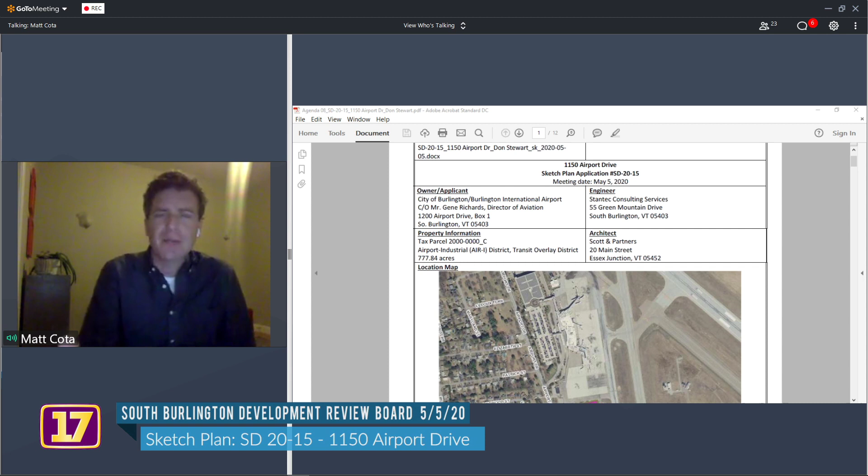Forgive me for this explanation, but I want to make sure that anyone on the phone or watching this at home later on understands what we're doing here. This is a sketch plan, so no one's being sworn in here. What is a sketch plan? A sketch plan is a high-level review and discussion where the applicant receives feedback from us, the board, on major elements of a project before it is fully designed. During the meeting, the board may provide oral guidance to the applicant, which does not constitute the board's determination that the application meets the purposes of the land development regulations.

These comments are to help guide the applicant to a later application that meets the LDR requirements and contributes to the goals of the comprehensive plan. This is not a formal hearing. This does not result in a binding decision. There will be no vote. The board may choose to continue this meeting at a later date if there are questions that remain to be examined.

The future date will be announced prior to concluding the item for the evening. Upon conclusion of the sketch plan meeting, the applicant who wishes to move forward with the project will have to submit a complete application. Next level review includes additional public notices and a formal public hearing. We're here to provide guidance as to whether this very preliminary proposal for developing this property needs to be refined in order to comply with South Burlington's land development regulations. This review will allow staff or the public an opportunity to provide input and recommendations to the applicant.

And with that, Matt, tell us a little bit about.

Matt, can I interrupt? It's John Wilking. Sure, go ahead. I just need to speak to conflicts. I don't think there's a conflict of any kind, but Don Stewart and I have known each other for 30 years. We're friends. Our wives grew up in the same town together. So I'm just bringing up that we have no financial conflict of any kind, but if anybody sees an issue, I will step aside. Thanks, John. Appreciate that. Okay.

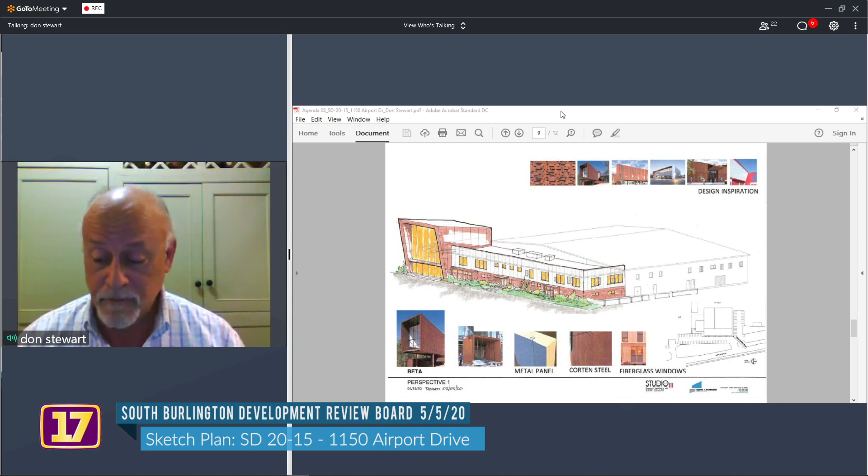Great, Don, I appreciate that introduction. I should have mentioned at the outset that back in January I did take a tour of Beta Technologies. I should have disclosed that. And I did try the flight simulator, which I crashed almost immediately. But yes, it is an impressive site. It's impressive what this company has done. I just want to disclose that I have some familiarity with the company.

So let's go ahead, Don. This is Dawn here. So I see on the staff report, the owner and the applicant is the airport. What is Beta's relationship to the airport? Are you leasing airport land? Could you connect those dots for me, please?

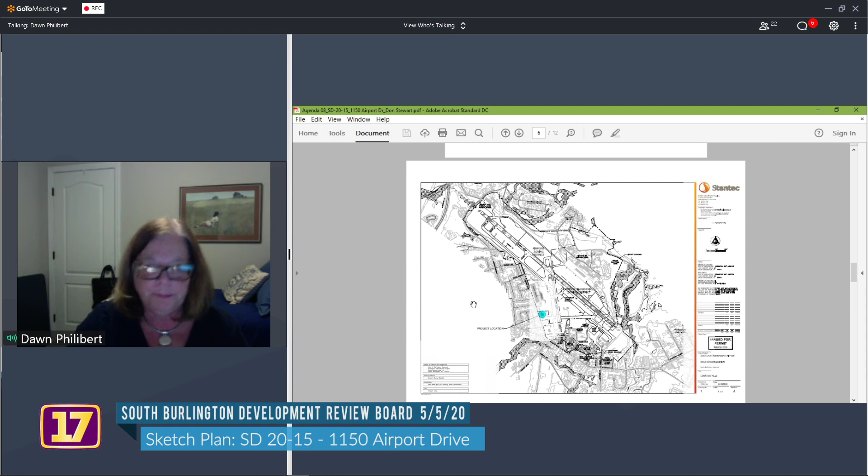Thank you for clarifying that.

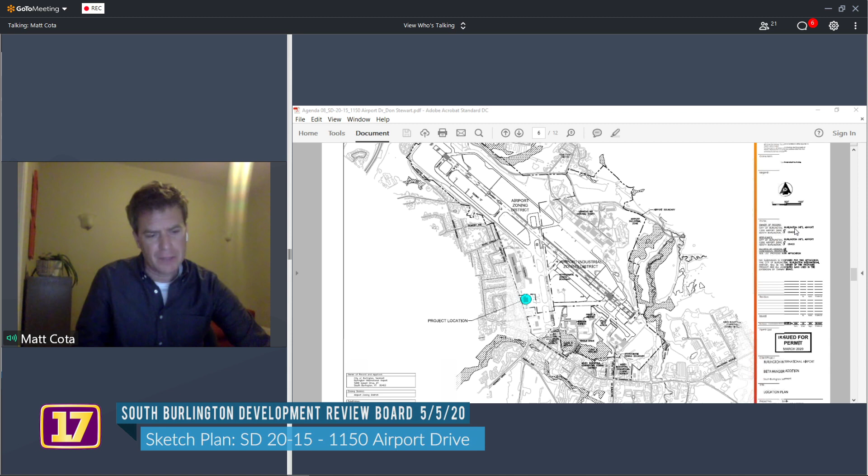Okay, I was starting with staff comment number 1. Staff recommends the board ask the applicant whether the existing or planned right-of-way shown on the plans determines if a height waiver is available based on the setbacks alone. If the applicant is not eligible for a waiver by providing increased setbacks, staff considers the board may only grant a height waiver by considering the project as a PUD, which allows the board to request additional improvements to offset the impacts of the requested waivers.

So Don, you understand what we're asking there regarding the setbacks? We do, and Chris Gendron from Stantec is going to answer. Chris, are you ready to answer on that one?

Yes, hi everyone, this is Chris Gendron from Stantec. So what we did is we used the planned right of way as indicated in the LDRs to determine the setback. And what we found is that the proposed structure, which is going to be 45 feet tall, is 36 feet back from that right of way, or from that setback from the planned right of way. So with the logic explained in the comment, that would allow us to be above that threshold of a foot per additional setback. So we're providing 36 feet of additional setback.

Hey Chris, okay, so it's John Wilking. Are you aware of the radar concerns that occurred with the hotel that was just to the north of there? Oh, of course I am, John.

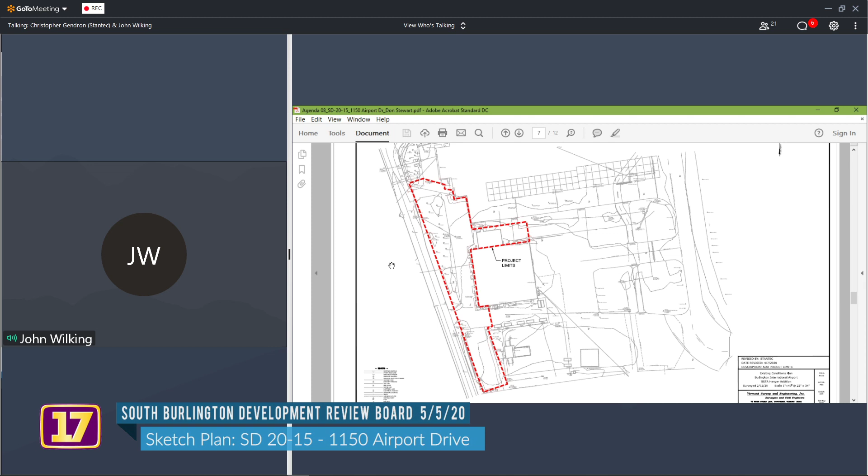Have you all taken a look at Beta's radar concerns with this? Yes, Beta has their own staff working on that, specifically working with the FAA to determine if there are going to be any height restrictions. At this point, there haven't been any indications of that, but it's very close to my heart, so I've brought it up many times and submitted whatever documents I could to assist Beta. There is a permit in, and they're working with the FAA to resolve it.

This is Don Stewart. If I may step in, Beta filed a 7460 on 214 to address all of these issues and have been in very close communication with the FAA. The FAA has looked at this and posed no initial objections, but that's not the same as making a ruling. So we are certainly aware of this, and it's critical to our plan.

This is Marla. If there's no other comments on the FAA stuff. Sounds like Chris is suggesting that they would like the board to consider the setbacks on just the portion of the building that exceeds the maximum height. That's not spelled out in the LDR. It just says the Development Review Board may approve a structure with a height in excess of the limitations. For each foot of additional height, all front and rear setbacks shall be increased by 1 foot, and all side setbacks shall be increased by 1/2 foot. So I guess it's up to the board to interpret whether that can be applied to a portion of the structure, or if the structure needs to be considered as a whole.

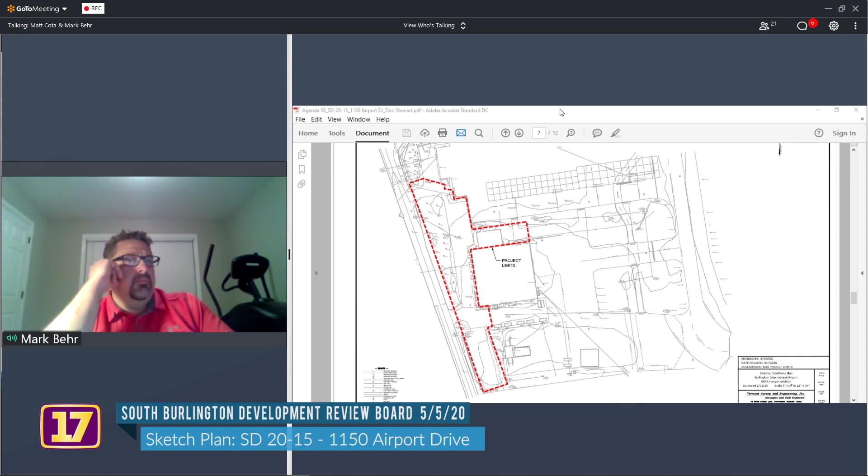Okay, thank you. So they may, based on if we don't... So what we're saying is that you're going to need a height waiver, right? Is that what we're saying then? Yeah. Could be, but one of the things they're doing here is vastly improving the look of the building. So yes, this is fairly simple. My only concern with the height waiver is we get in trouble with the FAA. Well, if we get in trouble with the FAA, they just overrule us. But I think to the extent that we can, and it sounds like we have the authority to do so, we should grant the height waiver. Right. Okay.

Maximum allowable setback coverage is 30% for all non-residential uses. Staff recommends the board consider whether to apply this standard to the project area or the airport PUD as a whole. Wait, why am I... Marla, can you explain what I just read, and what are the advantages and disadvantages? So the airport PUD encompasses many buildings, including the terminal, Heritage, Beta, and all these other things. Maximum front setback coverage for commercial properties is 30% citywide. So if you're a car dealer, you can't have more than 30% of your 50-foot setback covered in cars and parking for cars. So this project appears to exceed the 30% front setback coverage if it were only considered by itself.

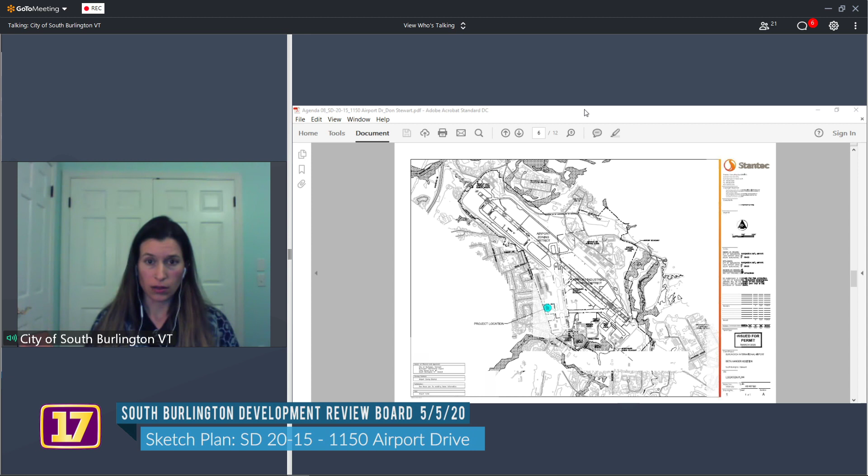So if you, Delilah, flip to the sheet that shows the limits of the project with the big, thick red line. Could we use the C102 drawing that we sent along today, that I asked Delilah to put up? That might actually help explain this, because it has the setback lines on it as well. Okay, all right, let me see. Is that in the supplemental, Marla? It is.

Called Beta Plans. There we go, I have it. Yep, that guy. Nope, the one you're on. Not that one? No, the other one, that's the correct one.

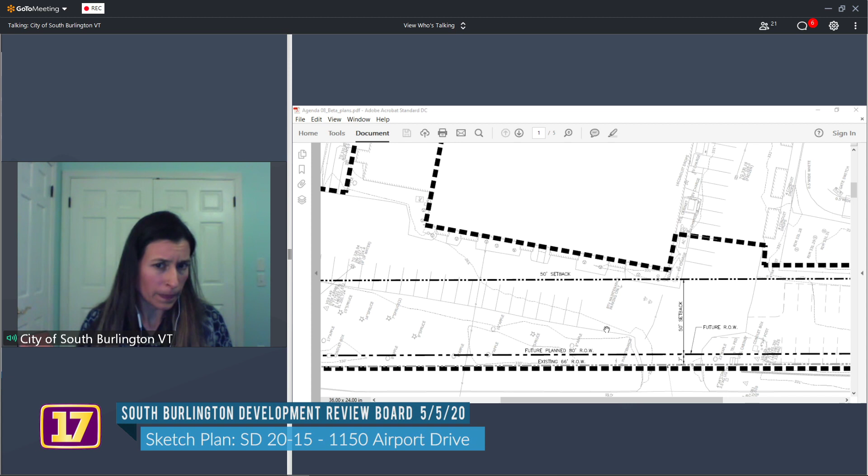So the front setback, zoom in. The front setback has quite a lot of impervious cover in it, and if you imagine the proposed plan, there's a lot of coverage proposed as well. Only 30% of that front setback is allowed to be covered for commercial properties. I don't think the board has precedent on considering individual properties or projects in the airport, or the airport PUD as a whole.

So I tried to think about this. What if this were a different PUD, say the projects along Fayette Road? Would we consider it as a whole, or consider each individual phase? If that helps the board think about it in that context, I don't know. What is the board's thought on whether to consider it for the airport as a whole, or for just this project area?

Marla, it's John. I think there's a couple of questions here because you've got a pre-existing building that they're adding on to, so it's not at all like Fayette Road. It's are they improving on the impervious in the front? And even if they, I think they are, right? I don't think they are. I think they're expanding the front setback coverage.

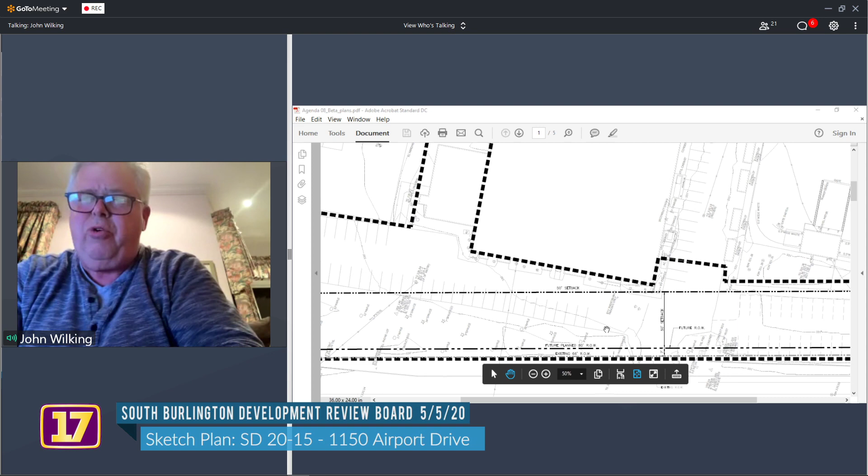Oh, you think there's more coverage? Mm-hmm. But then that's the whole parking issue. I would agree with Marla that it does appear, because the parking to the right is existing, part of the parking to the left is existing, but then the continued curve and curb cut out onto Airport Parkway for Airport Drive looks like it's all new.

Well, this is Brian. There was a comment earlier, and I'm paraphrasing John, that the airport is essentially the largest industrial park in the state of Vermont. I think the important part of that comment as applied to this question is that it is essentially an industrial park, it is a unit, so I don't have a problem considering the airport PUD as a whole here, because I think the airport is different than any other PUDs we're going to see in South Burlington. Yeah, I'm with you, Brian.

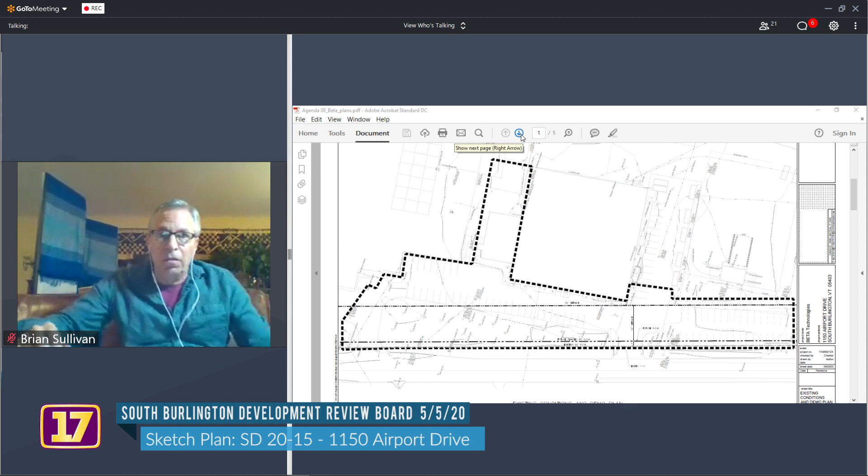Hi, this is Carolyn. I just wanted to point out that part of what looks to be parking is a plaza created with permeable pavers, if that helps the image. What do you mean by plaza, Carolyn? You'd have to zoom in on it, but there's a plaza that overlaps the parking lot. It's an entry plaza, comes from the main entry on the north, and that's been created with, or will be created with, permeable pavers.

So it's largely out of the front setback. The front setback is that black dash line just below. That's true. Yeah, okay, never mind.

I think this is Don Stewart. I think one thing to consider here, and certainly we are altering what is in the setback, but if you look at the total amount of green space being provided, including what we're doing in front of the building and to the north of the building, there's actually more green space in this new plan than there is now. There's just less of it in the setback area, but it dramatically improves the total overall sense of what the building is.

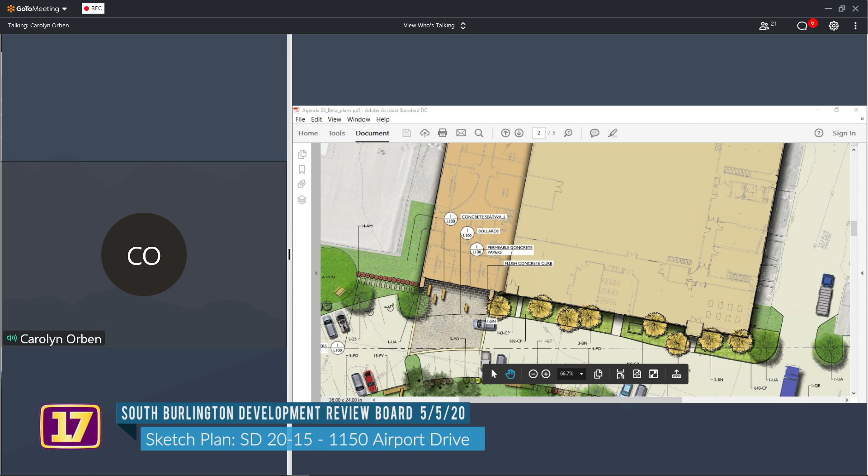But the entrance plaza does move from the building entrance out into the plaza, kind of like a carpet, and it's composed of permeable pavers. Then there's a series of bollards that run along the drive path to separate vehicular and pedestrian traffic. So we just felt like this was a much more elegant and refined way, and much easier parking. Yeah, just to add, there's no real green space against the building right now. Is that right?

Just to touch on that - there's no green space in front of the building, and the parking today is very difficult to maneuver around if you're parking there. It likely doesn't meet the city's current standards for aisle widths and parking stall lengths. What we're doing here is trying to bring this parking lot up to standard to make it better for circulation, make it better aesthetically, and make it better for emergency vehicle access. We made sure the curb lines would allow a fire truck to enter and exit the site from two locations, so it provides ultimate flexibility for them. We wanted to provide accessible parking spots on the building side to ensure they don't have to cross the roadway to get in. So there were a lot of considerations going into how this parking layout was set up.

We could also mention that one of the comments made was about parking perhaps being put on the side or the back of the building. Right now, Beta uses 14 parking spots on the south side of the building, but both the north side and the east side of the building - if you could put that picture back up there for a second, thank you - you are looking, there's a great example of what the building looks like now.

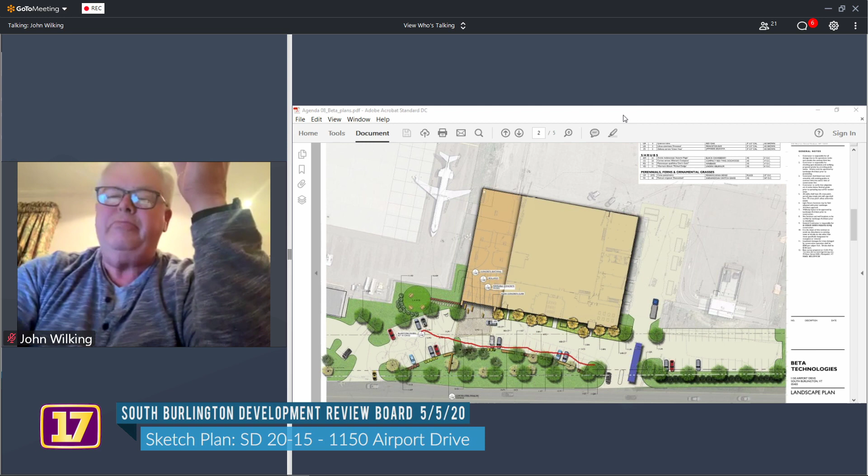Anyone else before I move on? That's to me. Okay, Don.

Thank you. The only comment, and I'm not sure this is relevant now, but it sounds like you have a very impressive aerospace technology plant or organization happening. Do you foresee in the future that this particular building, as imagined here, will provide you with a capacity for growth that you might experience?

Don, this is Kyle. Do you mind if I jump in? No, by all means, go ahead, Kyle.

The short answer is no. This is the research and development facility, and we won't be producing certified aircraft out of here. There's areas that we've submitted letters of intent on in the south area of the airport where we would be doing potential production, very, very preliminary. But this is where we would host visitors and do the research and development portion.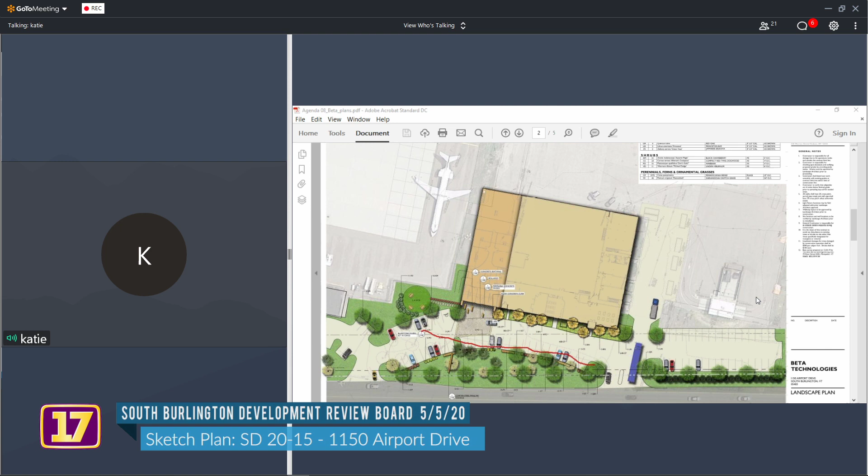Matt, can I have a comment? Yeah, go ahead, Mark.

So I'm leaning towards accepting it as using the whole airport as the PUD for the front yard lot coverage. I just do want to throw out there the fact that, while I think this Beta Technologies looks like a phenomenal company, I love the growth they're doing, the brain trust they're bringing into Vermont, but we don't approve companies, we approve projects. And I just want to make sure the board keeps that in mind as we review these projects, that we don't sort of jump on the bandwagon of approving Beta Technologies. We're approving a site plan, and a building.

We're not saying great, we're approving Beta, we're approving a building and a site. I do think that the site is being improved. I think that you're getting, well, you're not going to even come close to 30%. I think with the amount of landscaping, the building improvement, the green space up against the building, I can look at it being swayed that way. I just want to make sure that we as a board stay on our purview. That's a really good point. Thank you, Mark.

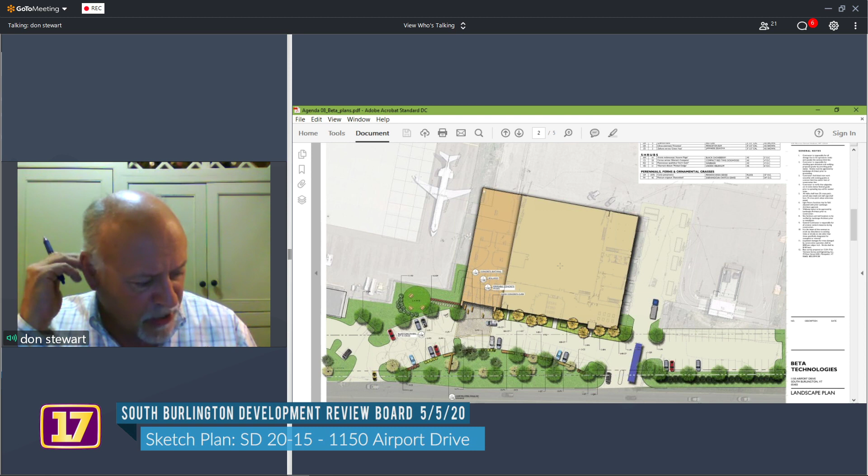Can I ask a question, or maybe it's more of a beginning statement. Looking at 1406, the general review standards are provided to allow the designer to exercise some creativity and invention while improving the visual appearance of the City of South Burlington. I think that's in part what Carolyn exercised with that creativity.

It appears to me that as you read through the rest of this, the DRB may approve parking between a public street and one or more buildings if the board finds one or more of the following criteria are met: it's necessary for ADA, there are unique site conditions, and the lot contains one or more existing buildings that are to be reused and parking needs cannot be accommodated to the rear and sides of the existing building.

I realize Marla's talking about a very specific case, and I understand that, but it does appear to me that in the general scope of what the DRB is supposed to be able to do is approve this situation. And the unique case is that you can't park cars on the runway.

You can't put cars behind the building here. Yeah, we can't. You could see the plane out there to the left, and that literally is—they park planes there, Matt. That's a Google Earth image. But they literally do park; they have a marked out parking space right there for an airplane. So we're not going north.

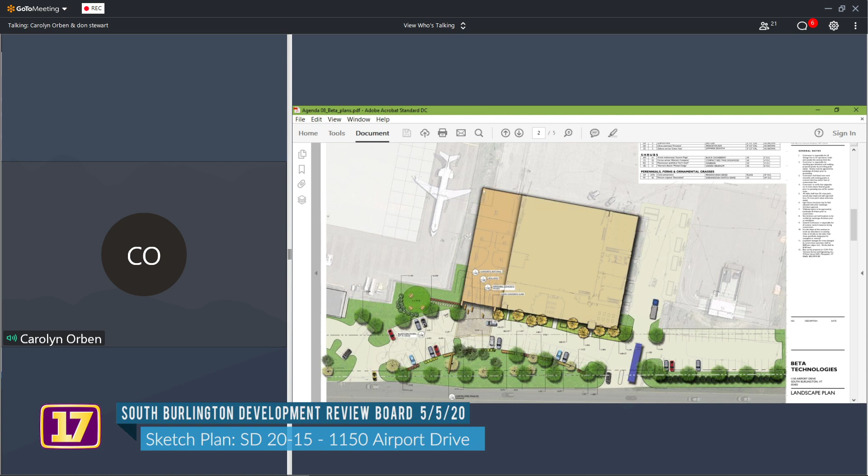Dalila, can you zoom in? I know I can zoom in too, but it'd be good to zoom in for everyone. What part, just the lot area? The parking in the front, if you don't mind. How's that? Maybe a little tighter? Awesome.

So what are the new lines here, what are the new spots? This is the existing parking, which is non-conforming. So everything in this area is an extension of the non-conformity.

Now I see a potential loophole. Which is what? What if the parking, and I know we're not designing it for them, what if the parking and the drive aisle were flip-flopped? Then the drive aisles are allowed to be in the front, and it would not be an extension of the existing non-conformity.

Say that again, what do you mean by that? So instead of having the drive aisle on the back—page up—if the drive aisle were on the bottom of the page where the yellow highlight is, and the parking spaces were against the building, it would not be a perpendicular extension to the building, right? Head-in, facing towards the building rather than facing towards the street.

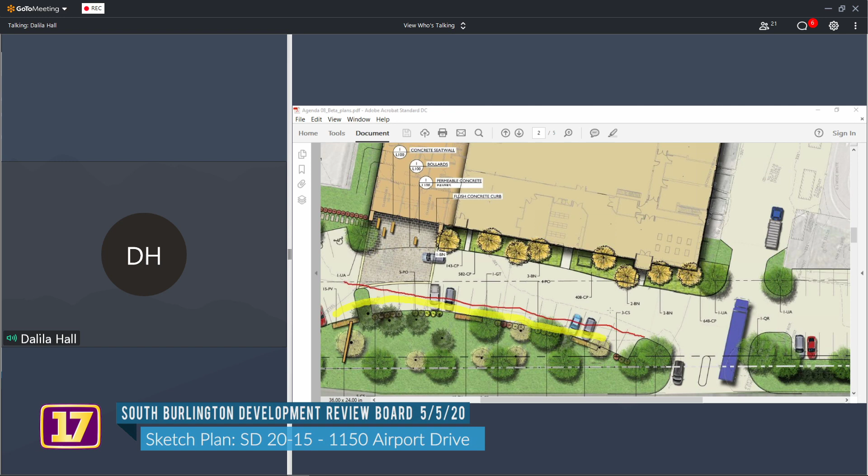Look, I think the cars where they are makes sense. I understand we don't want cars in front of buildings. This is a unique circumstance. I'm struggling with trying to come up with a loophole that might make the building not look as nice. But...

Matt, can I have a comment? Go ahead, Mark. Yeah, I'm in agreement on all of those. I do agree that there are site constraints that are unique to it, and we have in the past approved parking in front of a building when there were other issues preventing it from being moved to other parts, like power lines, easements, wetlands.

But the one thing I'm struggling with is what John had said, it's not what we want to do, it's what we can do. And as much as I completely agree this layout is very nice, I like it. I like the plantings, the green space, the trees and shrubs against the building, the curvilinear access drive and parking the way it fans out. But it is a pretty significant impact further to the front of what was previously there.

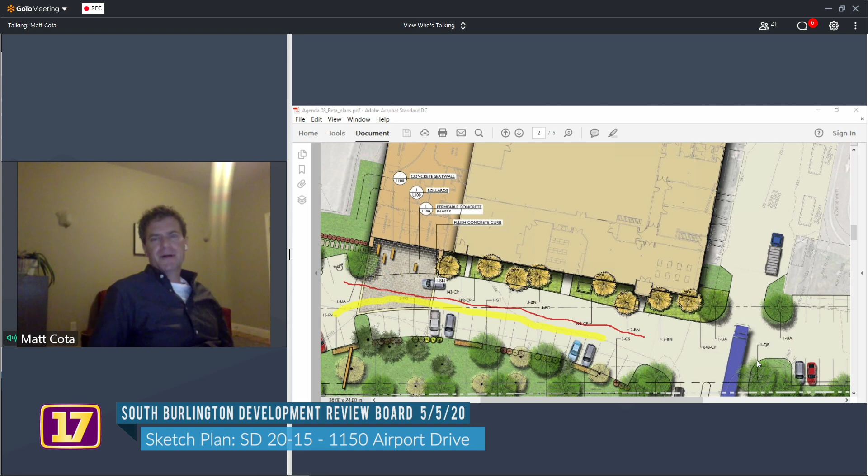We're trying to figure out how to make sure that once it comes to preliminary plat, and then final plat, or preliminary and final plat all at once, it's in compliance with LDRs, that we're doing our job, that it can't be challenged in court, and we're trying to get you to that point. So I understand there might be some more work here, but I don't think it's going to stop or delay this project any more, because you can't get a vote out of us tonight regardless. We don't do that on sketch.

So I've got a question. This is Carolyn, I'm just trying to visualize. I'm not sure how that's going to help, flipping the parking spaces to the other side, because I'm still going to have the same amount of pavement, and we're going to lose spaces because of the entry, or else it's going to have to overlap the entry. But unless we change the configuration, I'm not sure flipping is going to do anything.

So Carolyn, there's two things here, right? The first one was the pavement, which we think we're okay with if we take it as the whole PUD. If that's the interpretation at preliminary plat, that we're taking the PUD, the airport as a whole, then that's the loophole for the pavement. The parking issue is expanding the nonconformity of having parking in front of the building.

That's part of the issue. No, I understand that. If we're going to reconfigure this, and the idea is to flip the actual spaces from one side to the other, I don't see how that's going to alleviate the problem unless we go back to just a straight shot through the site like is already there. Because the drive aisle is going to stay the same size and the parking spaces are going to stay the same depth, so flipping them is just going to flip them, unless I'm missing something.

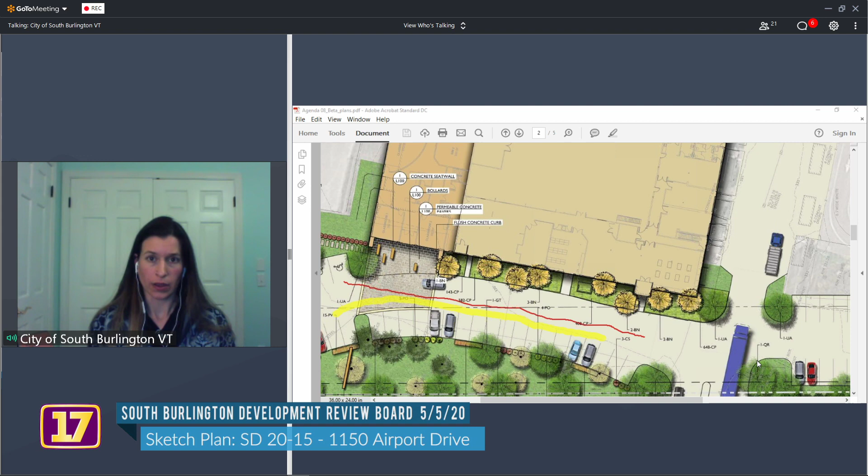Well, does it matter if we consider the PUD as a whole regarding the impervious surface, or does it still, Marla? The board has traditionally interpreted it as the appearance of the surface. I think there's some merit to permeable pavers or pervious pavement, and it could be considered a trade-off, but it would certainly not be a reduction in coverage. So it has its own merits and would be an improvement, but it wouldn't offset the front setback coverage, and it wouldn't reduce the front parking because it's still parking. And we don't have a big issue with the coverage anyway. So the real issue is that we have only certain ways we can approve parking in the front, and we've got to make a decision whether we agree this is the best choice versus something else.

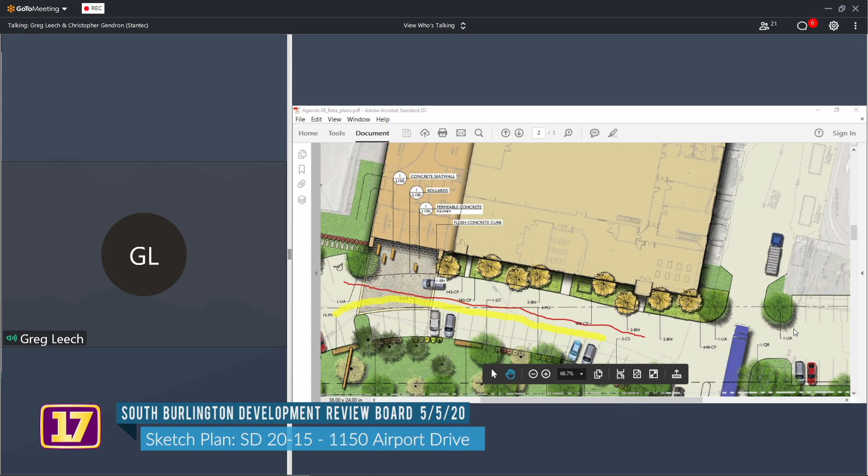Right, and that there are no other choices. Here's the question - I'm not sure, again we're not here to design the project, but if flipping it doesn't solve it, Chris, you've gone through that exercise. If you could make this a one-way circulation through, could the drive aisle be narrowed? You can't do that, so it doesn't help. If you go by the South Burlington standards, if you narrow that drive aisle, or at least the guidance they give, it's 24 feet for two-way and 22 feet for one-way. So it's really not significant enough to make any difference. I might have had my numbers a little off, but it's only a 2-foot difference that would be required. It wouldn't be saving much.

Okay, so Don, I know nothing about parking, but if these spots were slanted, would it give you more room and allow you to keep the same number of spots? You would typically lose spots when you slant them. It also changes how your site circulation would work. So if you're thinking about coming in the entrance, you've got people coming in from Williston Road, they're going to pull in and see the entrance, and other people from the other way - it changes the entire site. Okay, thanks.

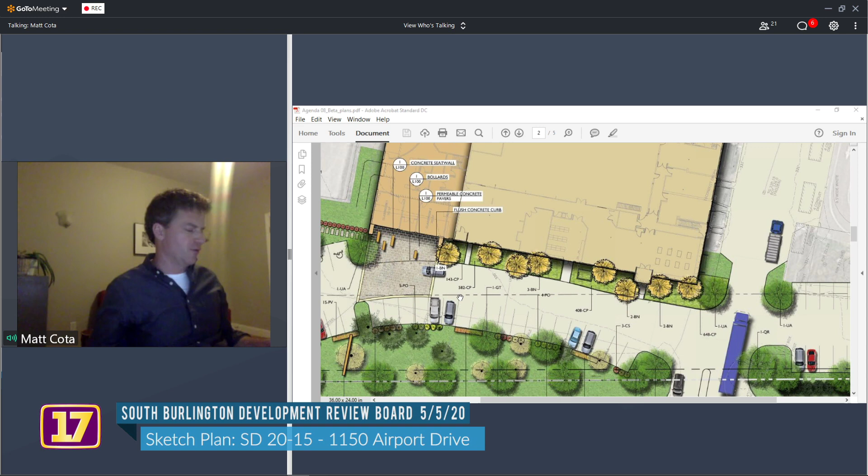Okay, have we exhausted parking? Should we go on to landscaping and screening? Sure. Okay, staff notes the board generally requires applicants to meet minimum interior parking lot landscaping on sites where parking is significantly altered from existing conditions. Depending on the results of the above discussion pertaining to parking, staff considers the applicant may be required to comply with minimum interior landscaping and shade tree requirements.

Carolyn, have you done a shade tree analysis? We haven't, but we are using a variety of shade trees along the perimeter of the parking lots, and it's single-sided, so that should cover it, but we're happy to look at that.

Yeah, you'll just want to show that at the next stage of review.

Fire protection, item 7: staff recommends the board ask the applicant to identify the location of the FDC to allow evaluation of the fire chief's comments. It is at the northwest corner of the existing building, right where the existing building meets the addition, where the plaza is, just inboard of that, exactly there.

Great, and that'll be shown on the next stage of review.

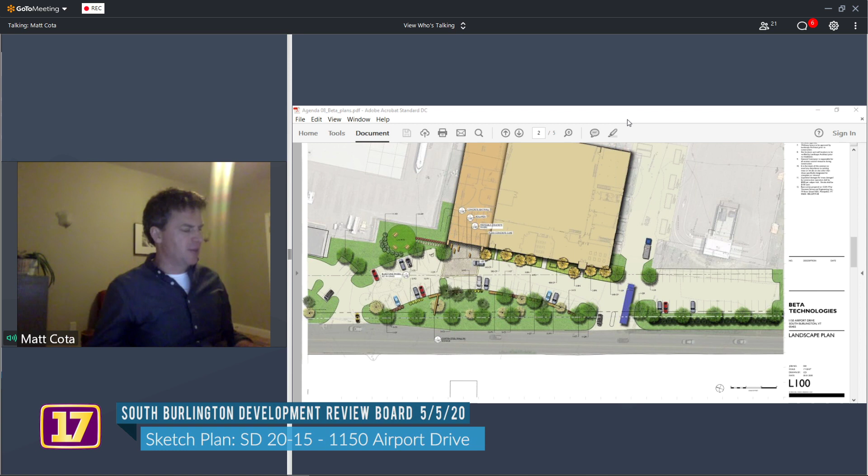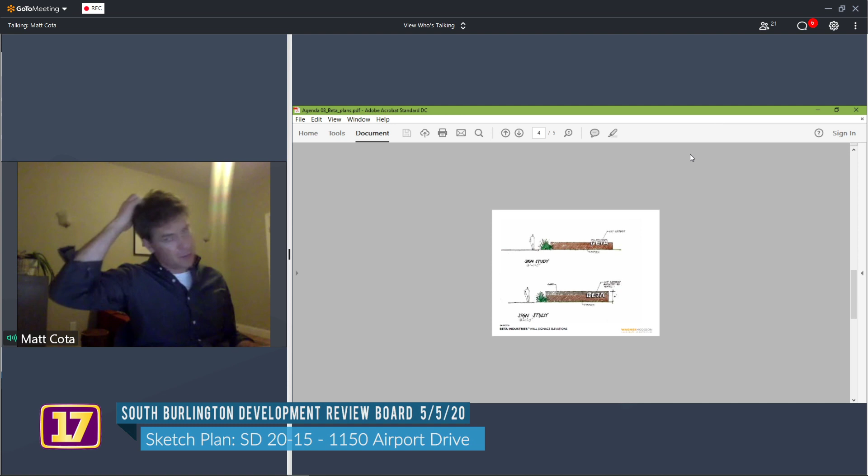Signage: the applicant has shown a potential sign location on their plan. Staff notes the signage is reviewed under a separate ordinance and may not be included on the DRB plan. Staff further recommends the applicant and the airport meet with planning and zoning staff to review allowed signage, as there are tight restrictions on the number of signs allowed for a single property. Noted.

Any other questions from the board about this project, or any other questions from the applicant about the board's comments, before I ask the public if they have anything to say?

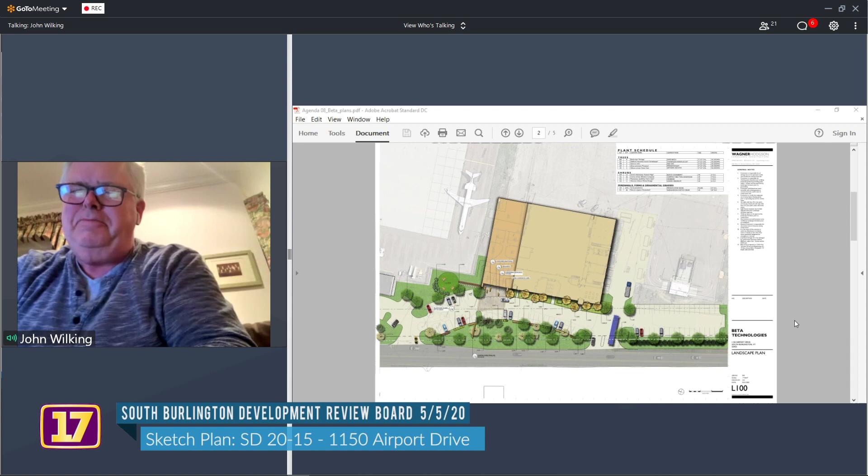Is it okay? Can I ask a question, Matt? Is it possible for Chris or Carolyn to get us a quick sketch, since we're having to continue anyway? It doesn't stop you from heading on towards preliminary and final plat, but if you could get us a quick sketch -- I think Marla needs it by Friday -- of what you think we talked about for parking, we could review that at the next meeting.

What I would say is, from our team perspective, that we would certainly make every effort to do that. I cannot speak on behalf of Chris and Carolyn, but it's Tuesday, and we aren't very far away from Friday. I'm certain that we could figure out a way to have this back to you by Friday.

Well, let's do that. Then we'll get you on the agenda for May 19th. We appreciate that.

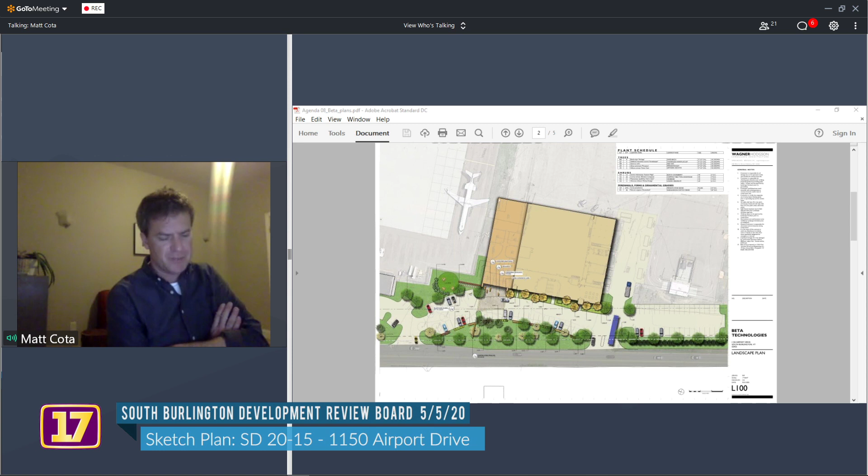Brian Sullivan, aye. Dawn Philibert, aye. Mark Behr, aye. Melissa Portman, aye. Jim Langdon, aye. John Wilking, aye. And Matt Cota votes aye.